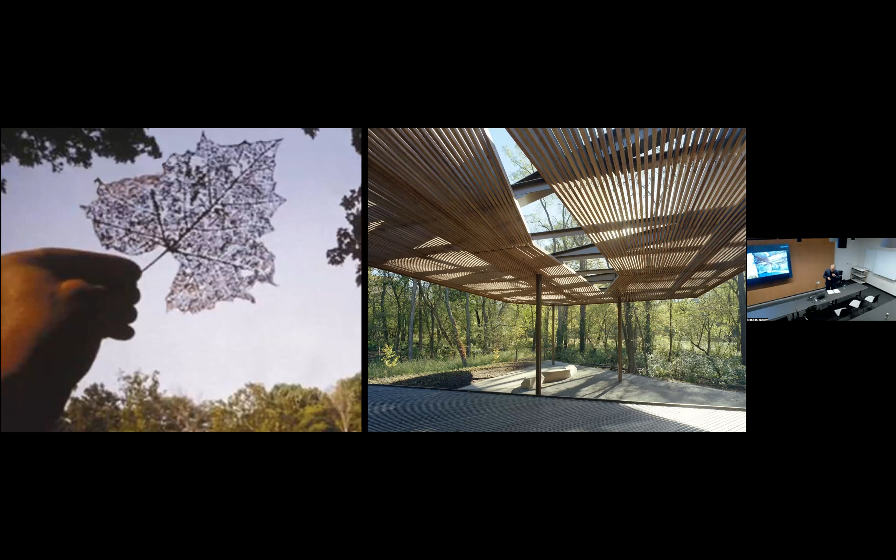So we tend to think of, and when I say we, I'm talking about my partner, Ati, and I, together with our firm of 25 based in Fayetteville, Arkansas.

Rather than a removal from reality, we think of abstraction as the process of connecting to a place, as generating a productive tension between the local and the global. That really is the dialectic which we're working with, and looking for possibilities for using an economy of means for a maximum of meaning.

As a firm of 25, we started out—I started as a sole proprietor 30 years ago—worked into this, mostly doing residential work, then slowly shifting to more public and institutional work. Now we're doing a variety of types and scales, everything from the root work, which is still carports and bathroom structures and parks and stuff, all the way to a new American embassy in the poorest country in the world, in Central African Republic. So, everything in between.

There's a reason for that, and I'll get back into it really carefully. Place is a really big central part of what we're about here.

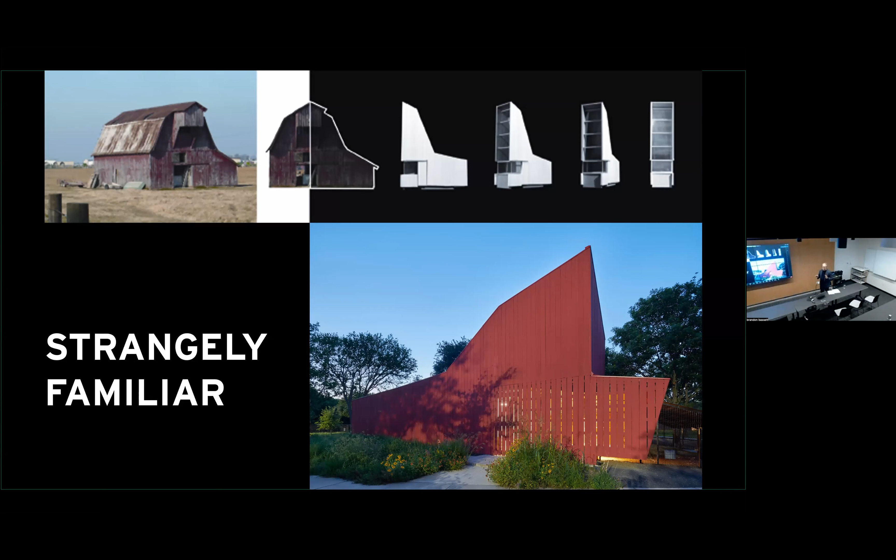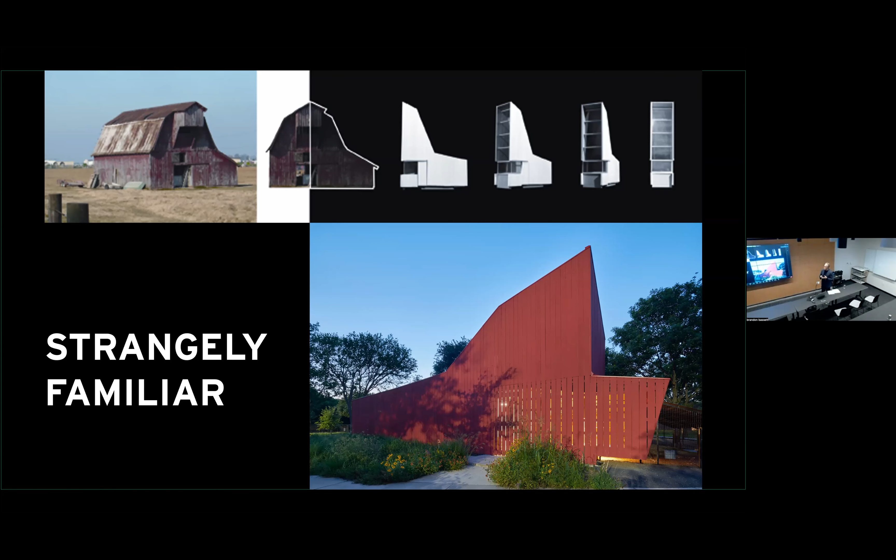And then of course taking the everyday. I'm really paying attention to the everyday, being great observers of your place. We're often just looking at things that are quite familiar with folks and resituating them, creating operations through programming or new siting that allows us to rethink the forms that we're surrounded by into things that are much more strangely familiar as we propose the new. Again, that productive tension between the local and the more universal.

So I'm going to show you a few projects, and I think one project that's really emblematic of a lot of what I'm talking about is a small church in Springdale, Arkansas, St. Nicholas Eastern Orthodox Church. This was a small congregation of Orthodox Christians who have a very ritualized and aesthetic way of worshiping. This is where they were worshiping in a rundown building in downtown Springdale, hardly the dignified place they were looking for to have the type of aestheticized services they were really hoping for. One of their parishioners had died, left them some money, so they bought some property along the interstate and wanted to build a new sanctuary and fellowship hall.

But the money they had left over was only allowed for them a budget of about $100 a square foot. And so they asked if we could build something like this, a nice Byzantine church. And we're like, well, yeah, maybe if it's made out of cardboard or something. It's like, you got $100 a square foot.

They said, well, if that's the case, then could you take this old welding shed on our property and turn that into our church? And I meant like you tear it down and then you build on the footprint. You saw a house today where that was done quite nice. And they were like, no, we only have $100 a square foot. Take that and turn it into a new sanctuary.

Of course, our hearts sank. It's like, oh my God, what are we going to do? And how do we get ourselves into this? Is God going to hang out here? I don't know.

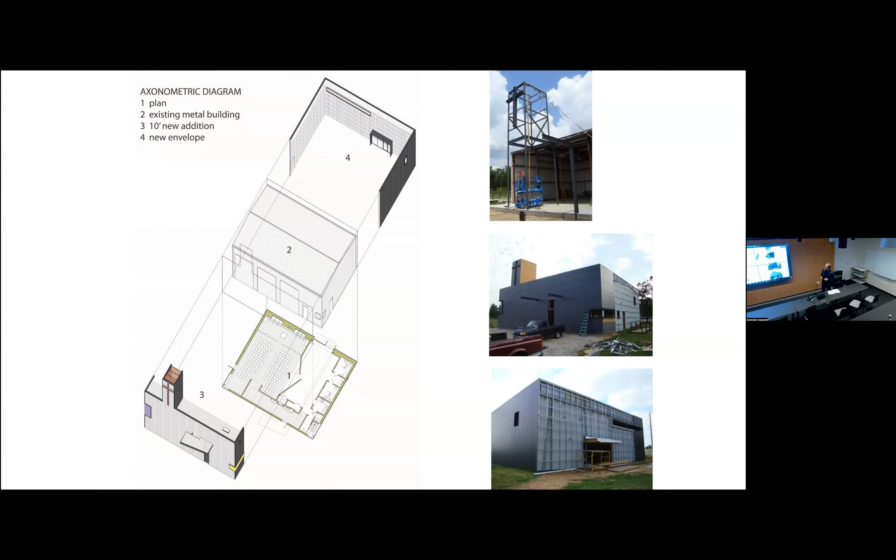And then we took all the transition details at the corners and sills and at the eaves and so forth and broke those ourselves so that we could get the seamlessness of the facade. And then we coursed every rib to a window or door or whatever. There's the fire door right where that concrete pad is. You can't see it. So everything's integrated.

So again, elevating this ordinary system into something, just through the use of craft and precision, into something I think much more otherworldly.

On the inside, we cut a window on the east side in the existing shell to let light in, the morning light. We have an iconostasis. It's made out of bar, angle bar stock.

And then the dome that they asked for, which was supposed to go on top of the building, but wouldn't go through the pre-engineered structure. So we actually put it in the plenum. But they couldn't afford the fiberglass dome they knew we had spec'd. The contractor wasn't sure he could make one that would work craft-wise.

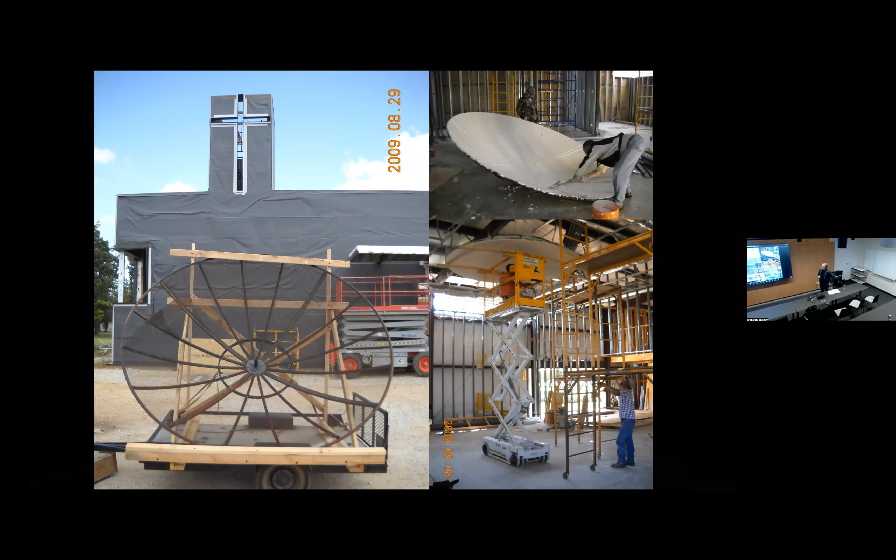So we were kind of in the middle of construction at a little bit of a dilemma. And he said, well, I have an idea. He said, I have a friend of mine who is an old metal worker and lives about 20 miles out in the mountains, and he loves beer. So we gave him some beer, a couple of cases, and he gave us a satellite dish. Here we traded. And so we just brought the satellite dish in.

It's natural lath, so we skim coated with plaster, jacked it up on a scissor lift, and they have their dome. So that's how we roll in Arkansas.

And I was so happy because I told Father John, look, Father John, now you have a direct connection to God. And he reminded me it was pointed in the wrong direction.

Keep moving. The beauty of the story is that in 2013, we were contacted by the AIA National Institute Honor Award program to let us know that this had won an Institute Honor Award. We were, of course, very pleased. But they said, we were really impressed with the budget of this building here.

So we did some research, and we've discovered that this is the least expensive building to ever win an Institute Honor Award. It underscored what we've been trying to do for the last 30 years, which is to demonstrate that architecture can happen anywhere, at any scale, at any budget, and for anyone. It's not just reserved for the few. It should be accessible by anyone. That's something that's really driven us as we've continued our practice and continue to grow.

So just working with humble materials that we can find in our own place. In this case, our cash crop in Northwest Arkansas is rocks, because we don't have good soils. We don't have an agricultural base, but we have our rocks. Folks would take the rocks they find right there on the earth and tilt them up to make cladding for homes and churches. It was a very economical thing to do.

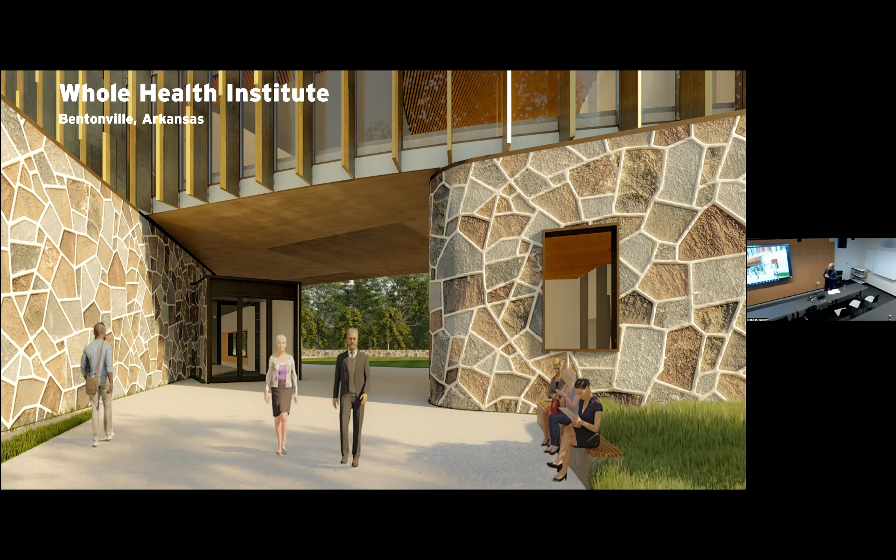So starting with this idea of a material, we begin to abstract and develop our own way of updating this sort of vernacular to essentially make the base or the podium for this building, which acts as an extended threshold into the campus of Crystal Bridges.

And this is it. Sitting astride that is a series of offices, lounges, and meeting rooms and meditation spaces. Down below is a lobby with an exhibition hall that you can see here, as well as event spaces and offices as well.

And this whole building, we were encouraged by the owner to begin to introduce curves, because we tend to like to do a lot of boxes. She didn't like boxes. It begins to resonate with the Moshe Safdie design of Crystal Bridges you see up on your left. We also did a parking structure that I'll show you here in just a little bit. She's also in the process of building a medical college, a four-year medical college dealing with whole health. So very serious, incredible investment in this intersection of art and health and well-being.

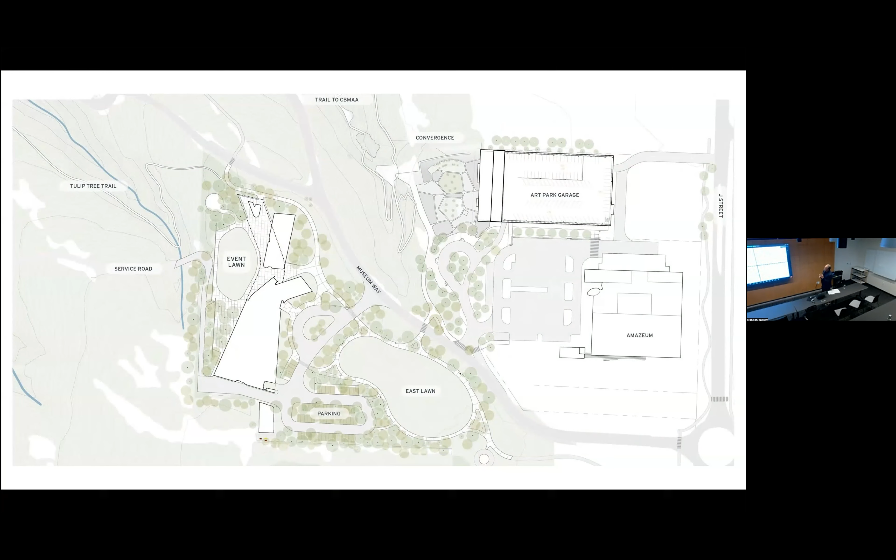And the whole curving shape is really curving around a ravine, so it's being shaped by nature, by the particularities of the siting of the building itself. Here you begin to see how it wraps around the ravine and these event spaces in a series of porches and a community porch in the upper floors.

There you get a sense of the 3D and its relationship to the art park and the convergence, which is an artscape in the ravine.

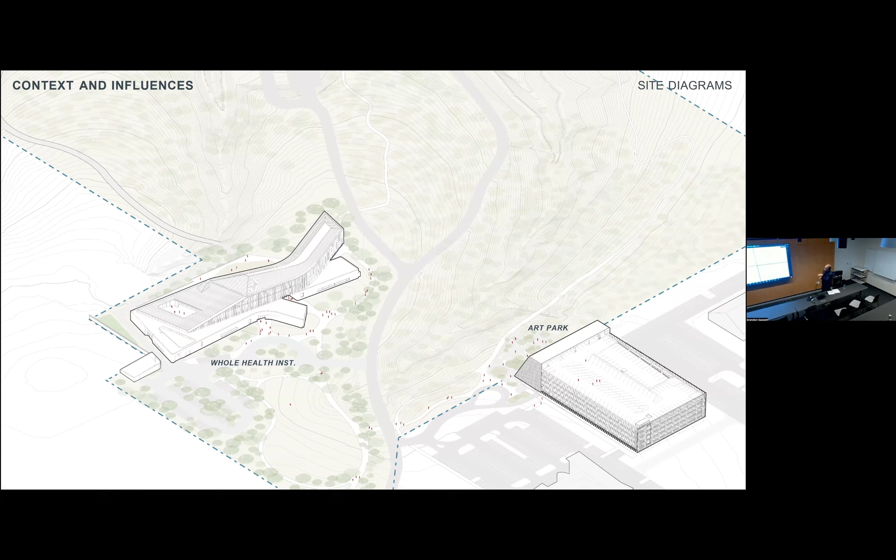So let's keep moving. The material strategies here, we began to think about this idea of the cave and the forest. The cave being the stone base that rises up, that's the kind of geological connection. The forest, we're in a state that's 60% forested, and we needed to develop a brise-soleil on the east and west to really control the sun. So we knew we could get energy savings, but wood is not the most durable material on the outside where I'm at.

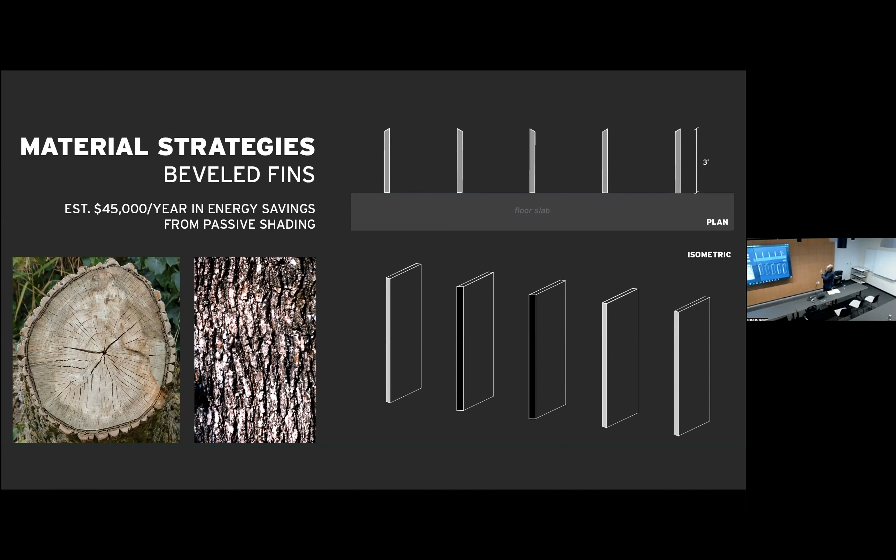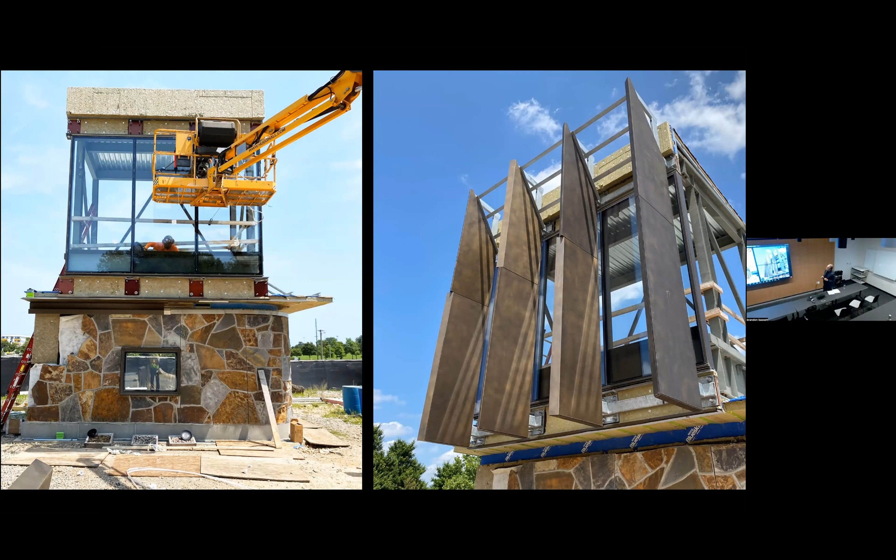So we found another material, which was a kind of pre-weathered brass, but for durability, we began to bevel the edges of these fins to catch the light and shadow to change over time. Here you can begin to see these mock-ups where we're testing the stone, testing the fins, this whole system of articulation.

I like to move fast, and this is killing me. But you can see the reflection off the fins, this idea of the forest astride the cave, the stone, and the base.

Wow, this is so slow.

So it's currently coming together, currently under construction. Then as you move to the inside, this idea of the cave and forest are carried through. I just have to be patient.

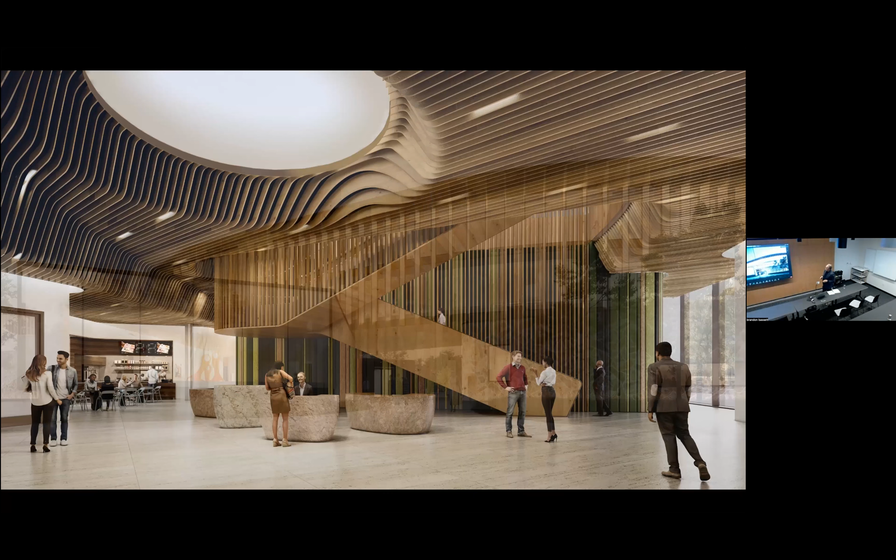Here we go. So the entire canopy of the ground floor and up above, it's all CNC milled pecan, Southern Arkansas travertine floors, stone floors. It's really at a museum quality level because it's actually part of a museum campus.

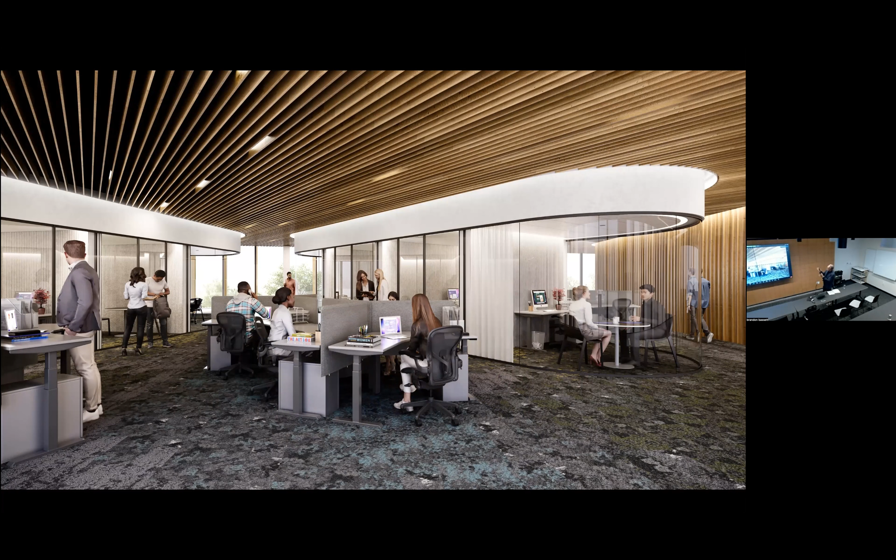But as you move up, there are open offices and consultation rooms above, as well as project labs and lounges here as well, for ideas to happen in all sorts of spaces and places inside.

And one of the feature spaces is a 30-foot high cone that's actually bent towards the north to capture north light, which is a meditation space for all the folks that work here, but also for visitors and patients that come as well.

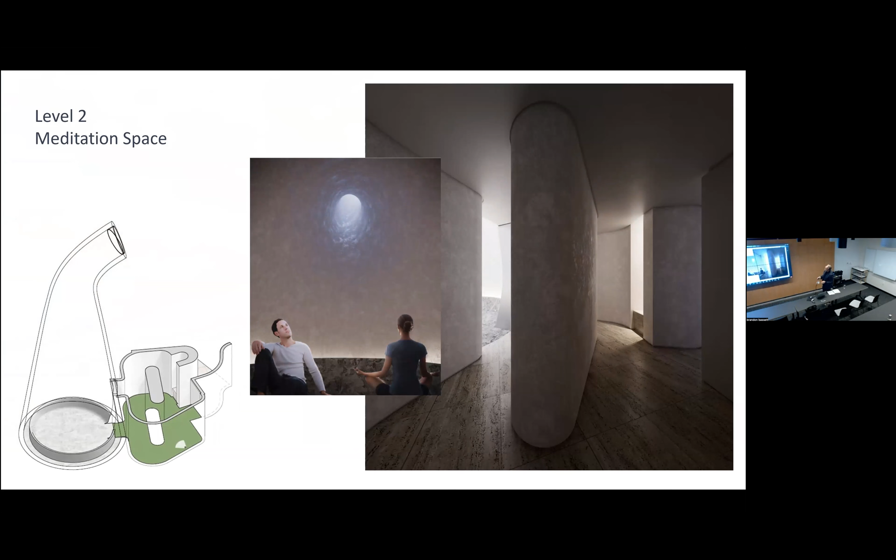And this is all kind of hand plastered. You can get to see that figure with this antechamber where you kind of decompress and then into this space, which captures again this north light and softly just deposited. It kind of just falls very gently along the conical walls.

Wow. Okay, and then the event space down below on the event lawns.

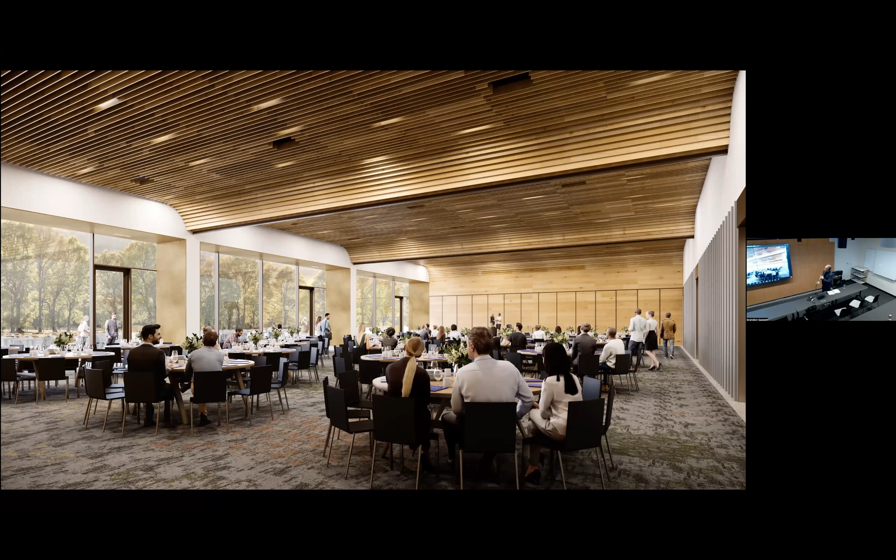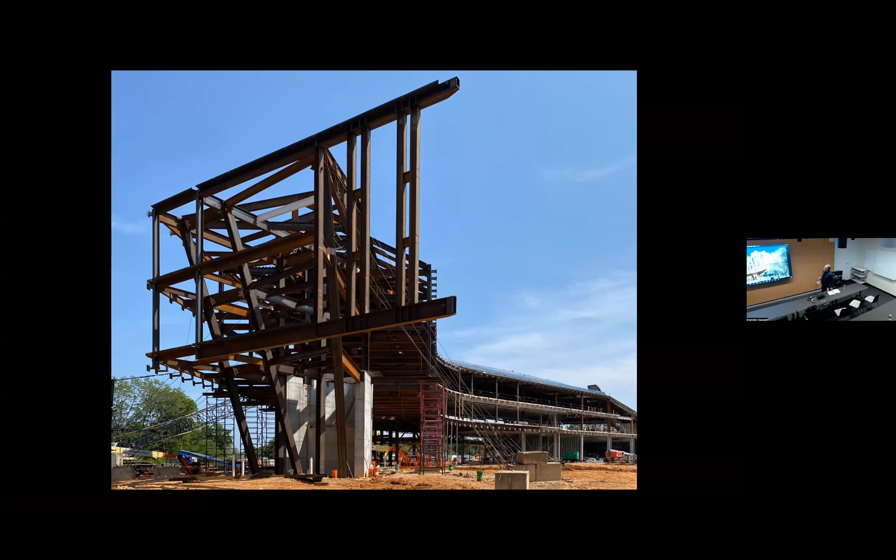Construction here. They did a 3 a.m. concrete pour on Friday. I wasn't there, thank God.

And I just want to show you very quickly our parking garage. This took the place of a surface parking lot, so we had to put 800 cars in a structure.

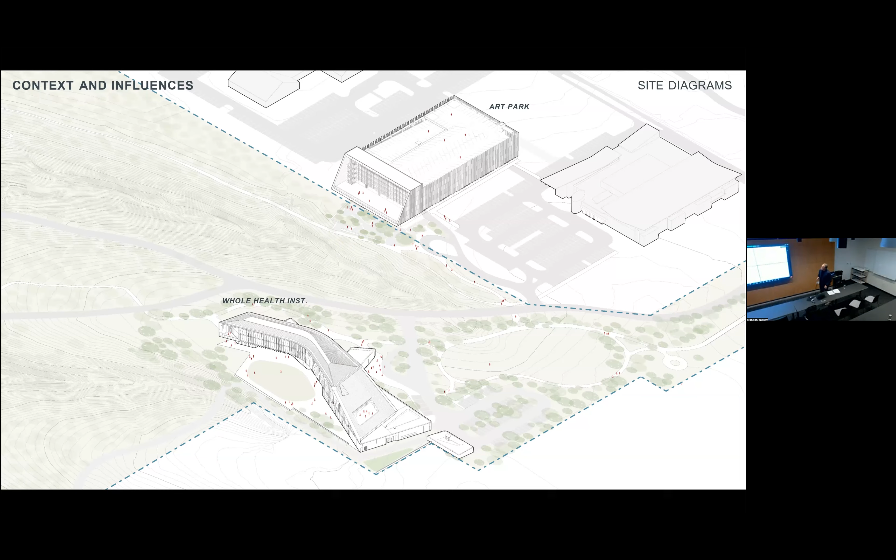But we didn't want to just make the structure about cars. It faces right onto an art plaza and play scape into a ravine that rolls up into this plaza. So we developed a proscenium, 150 feet wide, 4 stories tall, where art performances take place.

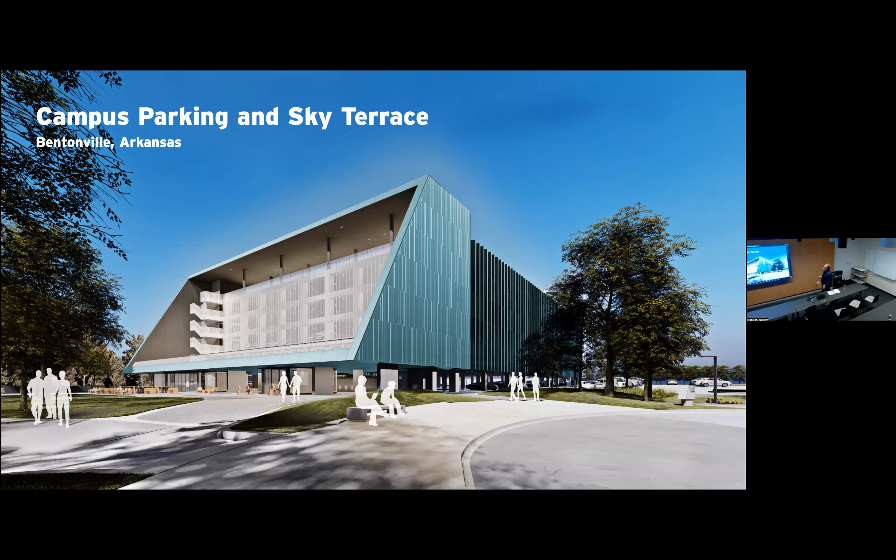There's a glass bar underneath the shop, so it really gets integrated into this landscape of art, nature, and the rest of the campus. So it's not just a silent figure here.

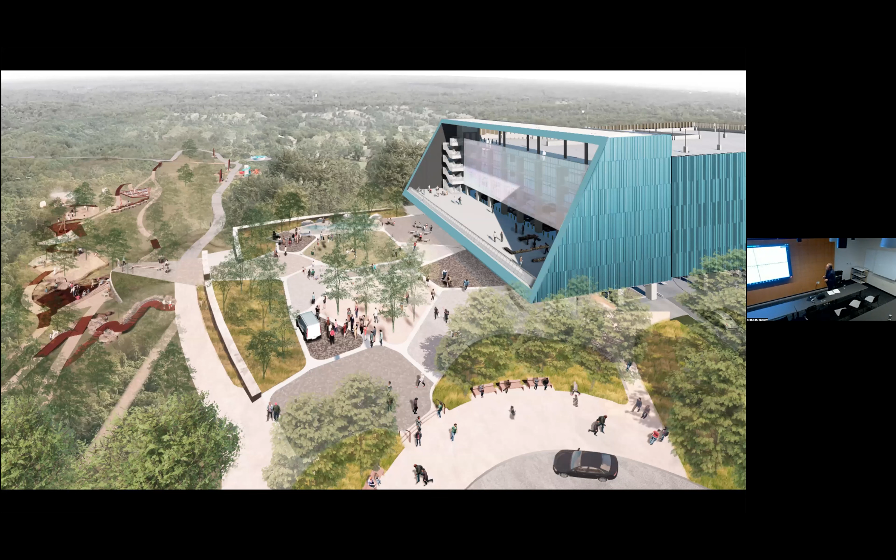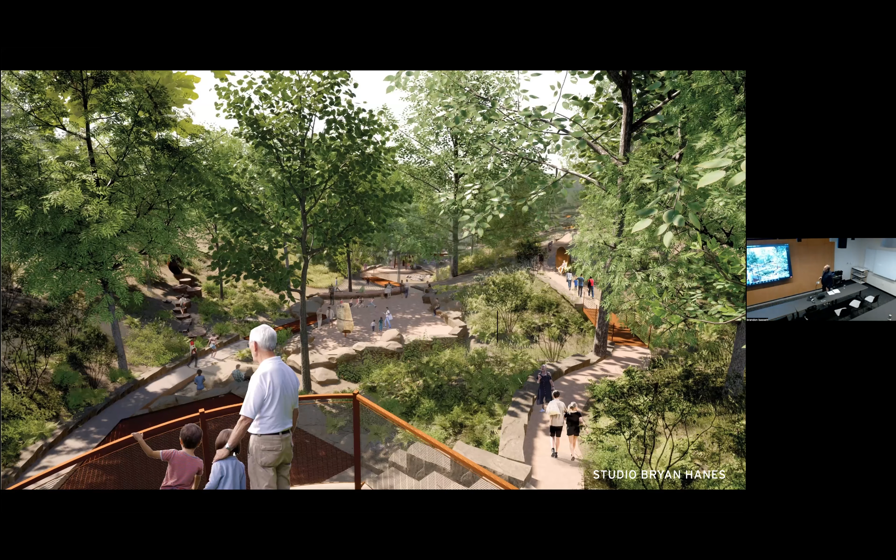Here you can begin to see it as it manifests itself once it's all done. It just got completed a few days ago, but this is the sort of type of play. This is the Studio Bryan Hanes out of Philadelphia, really great landscape architect, now under construction.

And as you come back up through, you see the proscenium. We call this the fish head. Come through, kind of get that sense, that kind of interface with the parking. So everybody comes through this.

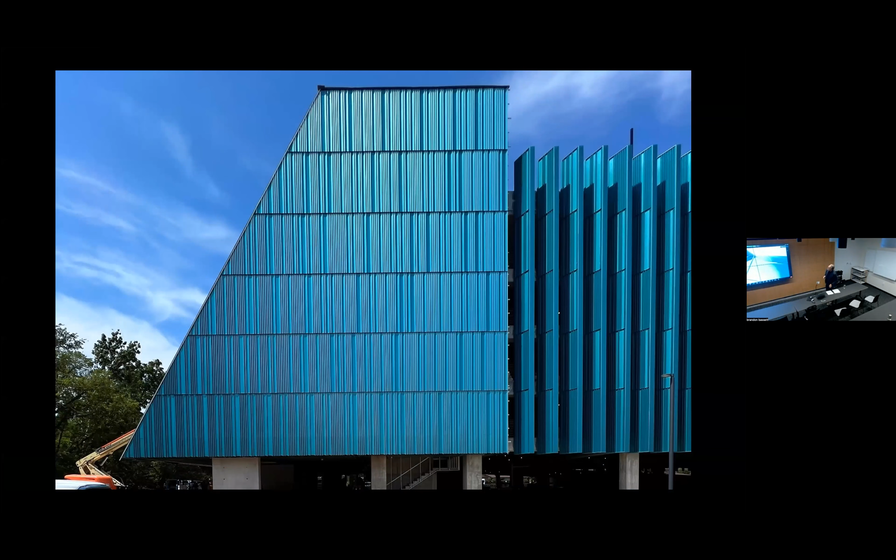So really trying to test that out rather than just using what they provided, and then using metal flake to enliven the surface. So this is all a '64 Pontiac Tempest. My grandmother would be very happy with that.

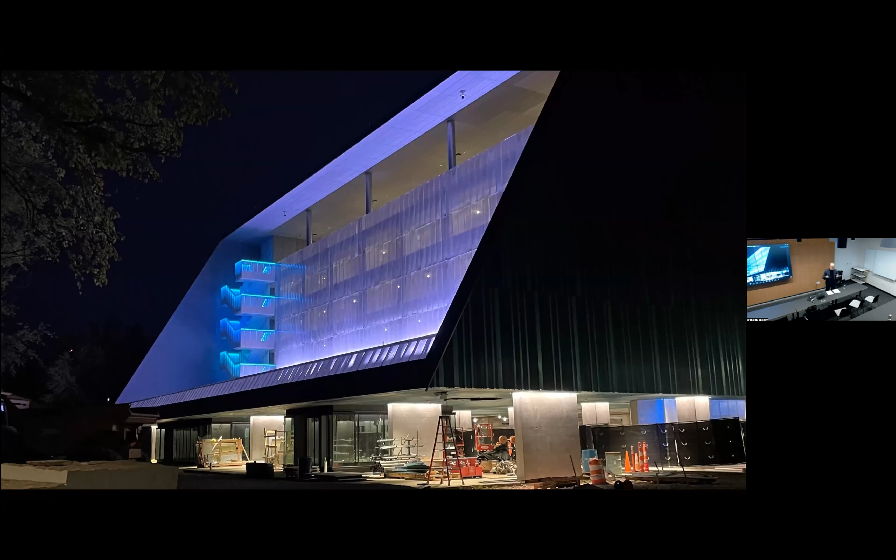Here we go. It really works quite well with the sky. Comes together. And then we have an incredible lighting program in this, so this thing pulses at night as well, with a variety of light phase shift changing.

And we've always thought about the fugitive nature of silhouette. As a former cartoonist, I like working in silhouette, working in section, and how that works against the horizon in these rural settings. The problem with a lot of suburbia today is most of the buildings there are all trying to outdo each other.

It's like 18 or 19 jigs and jogs on them, maybe 32 different materials, all this sort of excess and undisciplined way of approaching design. We thought, what could we do for this new pediatric clinic that could just use one form, two colors, and one material? That's it. So turn the volume from 11 down to 2. Of course, we're operating in suburbia, which is also known as the land of beige.

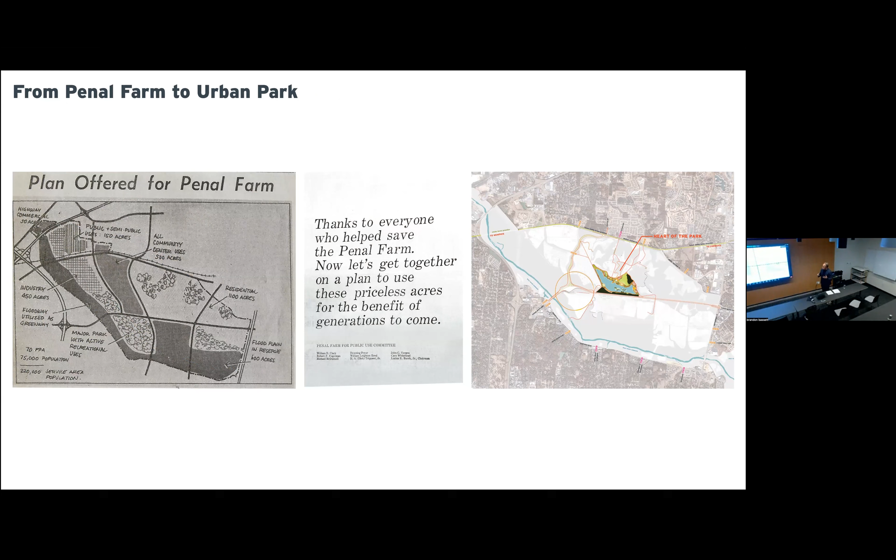Well, the citizens around that area rose up and said, we want to keep this kind of beautiful natural asset more as a park, even though it has its agricultural aspect. All of this is useful, and it could become a park. So it became a nonprofit - that's how Shelby Farms was born.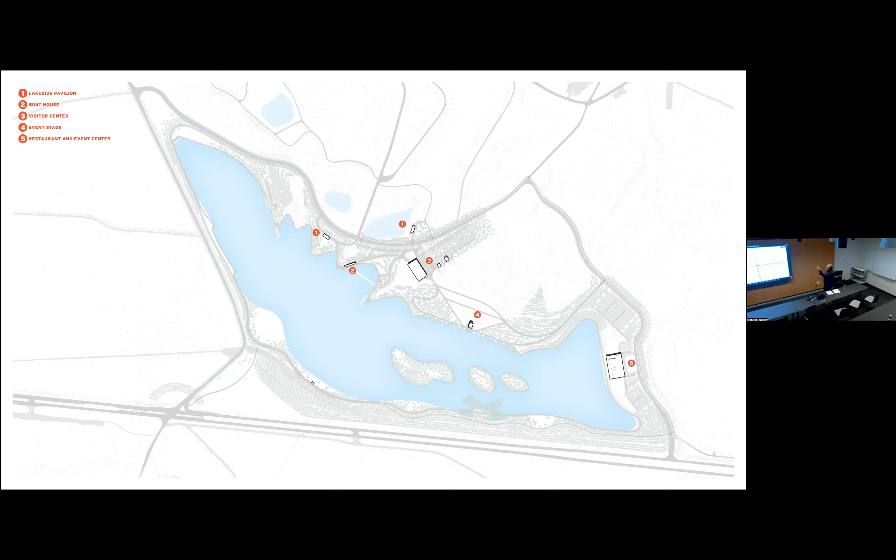You can see the heart of the park where we're working. So we have a visitor center, a restaurant event center, conference center, stage pavilion, boat pavilion, shade pavilions - all of that to help articulate the edge and the spaces between with the field operations.

One of the things we noticed on site is that wherever there was shade, there was people. And it reminded us that we were working in old agricultural land, formerly fields, with no trees. The trees aren't going to come in for a while, so every building had to create its own shade. That's part of this porch language attached to each of these figures that make up the ensemble of buildings we did, looking back at the vernacular ways to create shade and breezes: dog trots, porches.

We did our first building, an 8,000 square foot visitor center with an 8,000 square foot porch that faces south. It's all made with aluminum bar grate panels, stuff that you typically walk on, used a lot in the agricultural industry around this area. So we turned that into a cladding system. We figured out how to not only get it to become cladding by disengaging it from the superstructure and creating a substructure, but also make it operable too.

Then we have third growth cypress, local cypress, as the other primary material. So you approach through this box, and then through these series of breezeways that take you out onto the porch with this 32-foot cantilever, all cooled by 5 20-foot big ass fans. The thing about being in Memphis in the shade, you're still going to sweat, so we ventilate that shade much the way that nature does, and make this great place that they can program almost year round because it's in the shade. So it's a place for yoga, receptions, and they get revenue for it - another stream of revenue, and it creates a really responsive skin that reflects light.

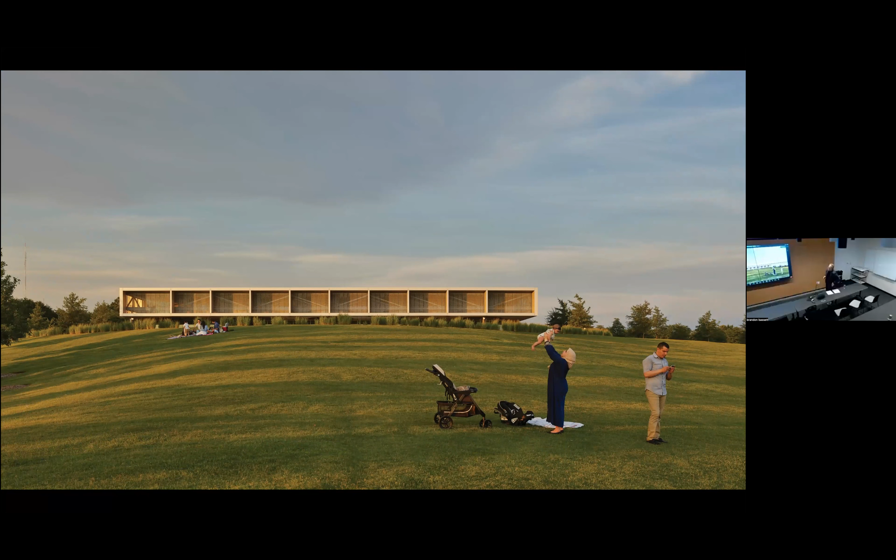Yeah, take off your shoes. And that sounds good. I don't know, is that the kid in the screen?

I think it's quite beautiful how James Corner and his team configure the land to work with the buildings as well. It's a nice simpatico that's going on there.

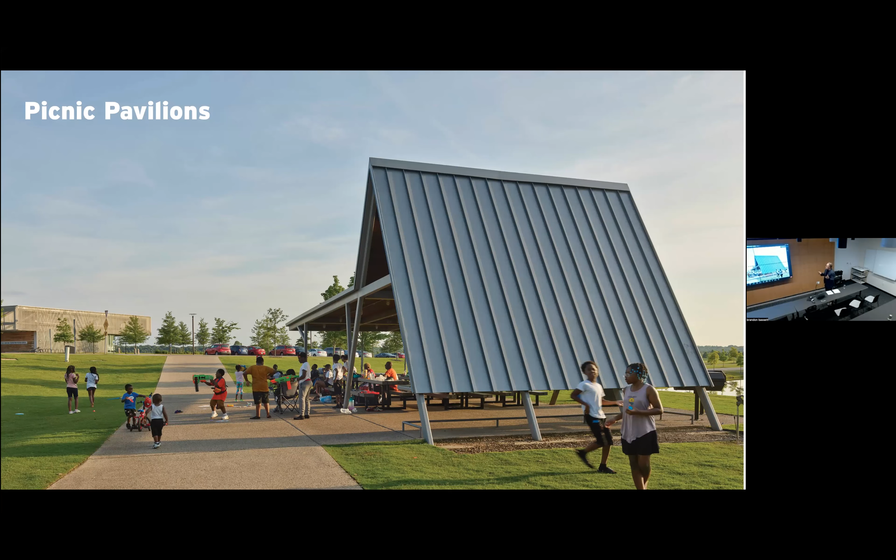Other things we did were the picnic pavilions we call the crickets, which people love. They're great for family reunions, sometimes booked out 3 months at a time for that, dotted along the edges here.

And then of course the boat pavilion that has all the kayaks and canoes in it, as well as concessions along the water, and it's also near the water play area. Similar palette of material - really just 3 materials for the whole project.

This is the stage pavilion that uses the event lawn, but also acts as a stage for events on the lake. And then when it's not being used, it's a shade pavilion itself - so kind of multifunctional. It's really important.

And then the last building is the conference center, the restaurant conference center. At the time this was built, we were working with Kimbal Musk - not Elon, Elon's brother, the other guy you never hear about - but he actually has farm-to-table restaurants based in Boulder. This is their first ground-up restaurant, you see on the right side.

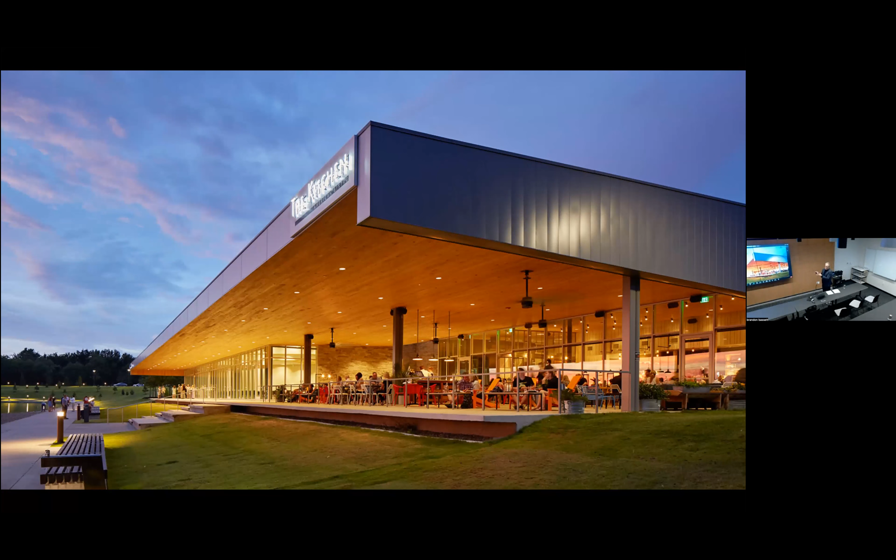The really distinguishing character here is an 80-foot deep porch where there's more seating outside than inside, right along towards the west. There's a 10-foot high canopy that knocks down the sun, which sets up these beautiful sunset dinners and so forth. It really becomes a kind of hub of activity for the park, both day and night.

Since it's been open in 2016, it's turned a profit every year. Its attendance has increased by 50%, and its reflection in terms of diversity has increased by 60%. So what it underscores is the ability for architecture, the transformation of a landscape through architecture, to certainly strengthen institutions and to be very impactful in the community.

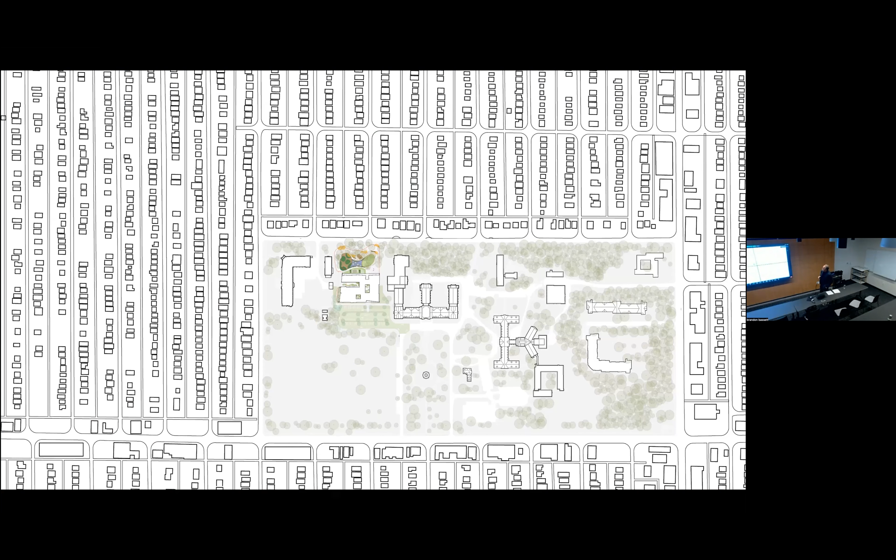Now, we had a couple of challenges. One was that we didn't get to do the community engagement ourselves. That was done by a third party because you had to have the trust and credentials to engage with the neighborhood, but we got to interpret the information we got back. We were working with Wendy L. Jackson, with the Kresge Foundation.

One of the things that we got back was that they did not want a monochromatic building. The community wanted something much more polychromatic, that's more representative of their culture, inclusivity and diversity in the neighborhood. That was kind of terrifying in a way, because there's one thing to do lots of color on the inside, but to pull it to the outside is scary, at least for us, since we like solid colors. Well, I got to thinking about it, and I thought, polychroma, and she said, sort of like a quilt, like a patchwork, perhaps, of color.

The other thing we had to do is the building had to be as resilient as these stone buildings. So we came upon a simple glazed terracotta panel rain screen system, made in Germany, that would have incredible resilience - it would look the same 50 years from now. That's what they wanted. But we needed the color.

And when we're talking about quilts, I said, have you ever heard of Gee's Bend in Alabama with the quilt ladies? She goes, well, of course, I've been there. And I was like, wow, so have I. I said, well, what do you think about that? She goes, I think they would be a great source of inspiration. So we went and met with the Pettway family there, getting a feel for how they do quilts and how they use accents.

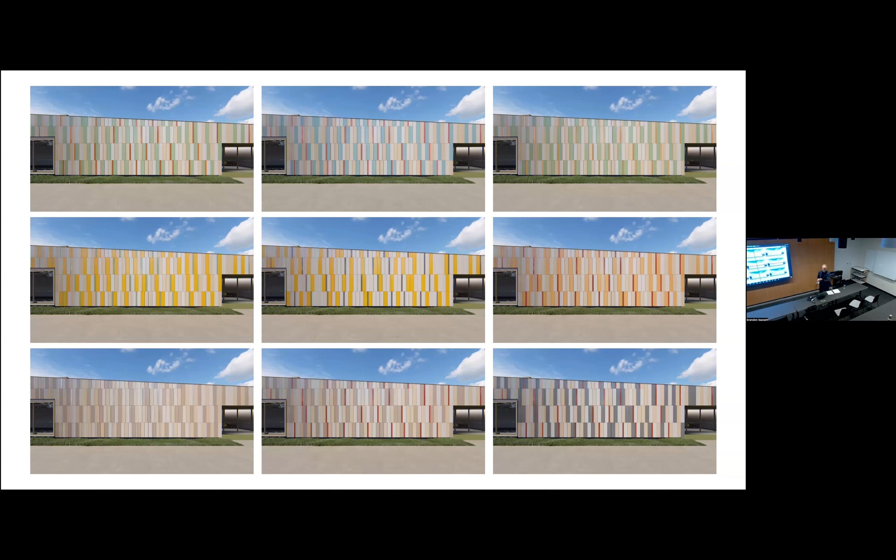Every color costs money, so we were limited. We had to have a ground which would work with the existing shades of limestone, but also accents that would enliven that. So we went again to Gee's Bend, met with the folks, came back and did over 150 different iterations. These are just a few of these palettes, with prices attached to each one, to find the exact right one - which is the one I've been showing you - but it really brought it to life, and it's vivid and a great source of pride. Unlike any other thing, the identity issue is I want something no one else has, and I think we certainly achieved that here.

And then, of course, the light is grabbed from a series of windows from above, from the side, from the front, very gentle and welcoming, with the wall that takes you into the entrance. You just sort of roll into the lobby area.

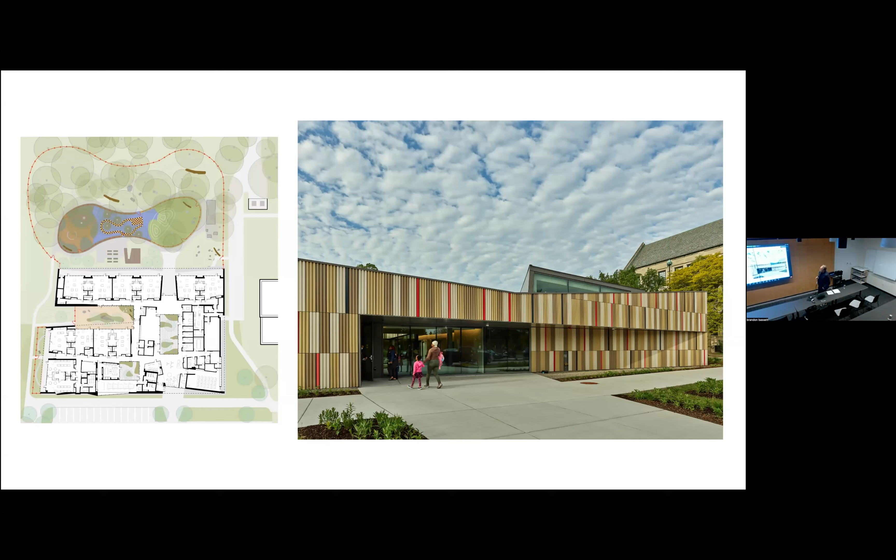As you come into the lobby, the first thing you see is a courtyard with its controlled softscape and hardscape - places for reflection, places for play, places for learning as well. There are 3 of these courtyards, and they really inform and activate all the spaces around them, so there's no space that isn't cross-programmed in some way here.

All of the classrooms have direct connection to the outside, so a learning lesson can take place here but can immediately move to the outside to make a point. That immediate connection to nature was also designed by the community because, as you know, a lot of Detroit - 60%, I think - is somewhat empty and abandoned in certain degrees, or blighted. So having this constant positive reinforcement of nature every day was something that was desired, and these courtyards can be used in multiple ways, from dining to play to doing lessons.

Every space, even in the hallways, we carve away places for people to sit, places to socialize—in this case, a reading nook. All of it gets activated as learning space. There's even community rooms and a coffee shop, so when parents drop their kids off, they can hang around and don't just have to go back home. We have community groups meet here as well, so it has a role to play during the day and even at the end of the day.

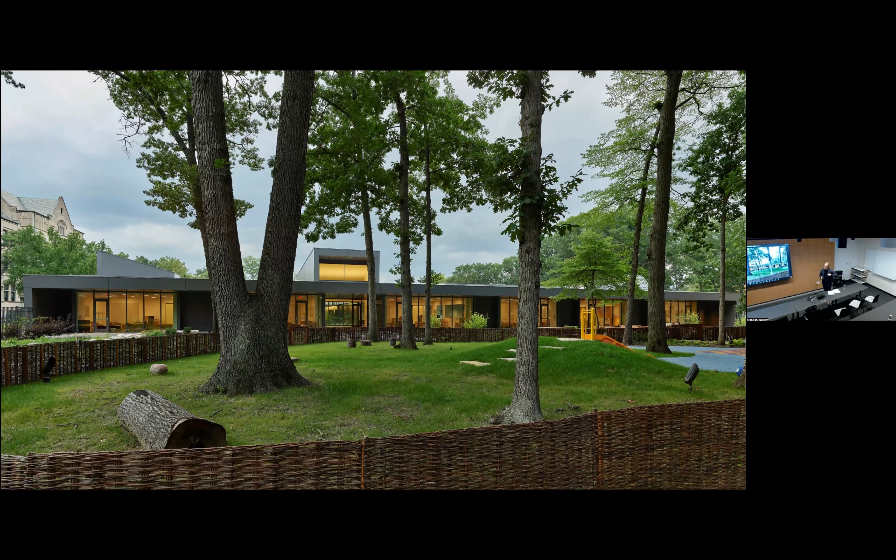Then this spills out into a southern lawn. Margie Ruddick, our landscape architect, did a beautiful job weaving in a learning and playscape amongst this grove of trees. It's really quite lovely, incredibly active throughout the day, but at night it acts as a beacon back to the neighborhood. Most of the folks from the neighborhood actually walk this way to go to school.

So let's see, does it want to change? See how this works. Okay, great.

It's been a huge success. I just want to say that the word people use for it is joy. The students, the faculty, the staff—there's just a great sense of joy in this kind of world within a world that we're fortunate to make.

I went back to Gee's Bend, just by chance was traveling through, and I stopped and saw Miss Petway to see what she had for sale for her quilts. I told her, you know that building I was telling you about is done. She said, oh really? And I said yeah, let me show you. I had a photo on my phone, showed it to her, and she looked at it and said, you know what—you've given me an idea for a quilt. So it all kind of comes back around.

One of the things our firm has gotten known for—and I think you probably see a little thread of this through some of the projects—is the desire to ennoble the prosaic, to take the everyday and elevate it in some form. We had a recent opportunity. I've only shown this project about three times since it just got completed in Fort Worth, Texas, and it's an unusual project.

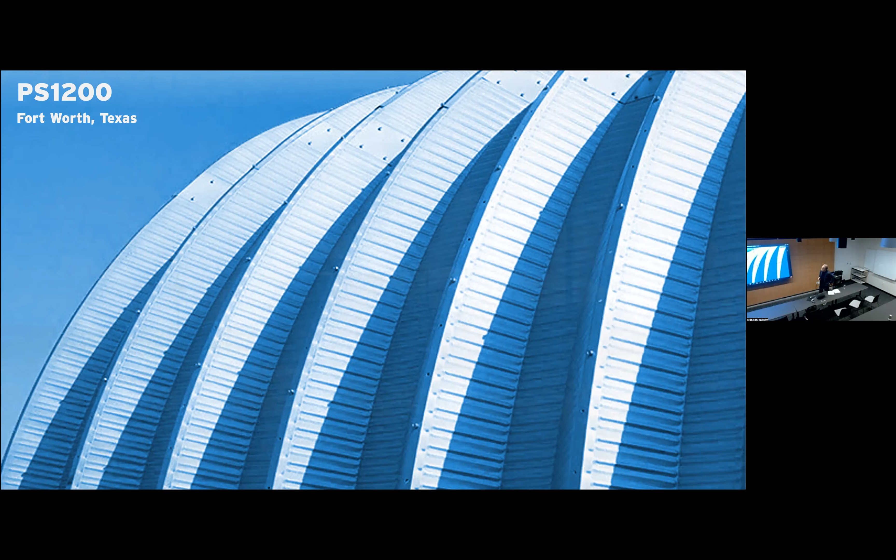It's a mixed-use project, but it was really born out of being in Detroit. While I was there, I met a young developer named Philip Kafka. He was buying up a million square feet of basically abandoned property near downtown and trying to repurpose it through housing enclaves, public plazas that would sprout collateral economies around them—restaurants, office space, that sort of thing. What he was using to articulate a lot of this was the simple Quonset hut.

Normally you see a Quonset hut out in the country, really light industrial—maybe somebody will live in it once in a while, but that's usually how it's used. Philip tends to use it in a much more creative way and makes these enclaves. He has one called the Caterpillar, which is 600 feet long, that he cuts up into housing. But it's something he also wanted to test out in Fort Worth, where he grew up—in Dallas, Texas, actually, he and his father.

This project is called PS 1200. It's in the Magnolia neighborhood, an emerging neighborhood in Fort Worth, Texas. We're all using the Quonset system. It's got housing at the top as the backdrop, sitting above a base of offices, and then a restaurant, grab-and-go, a gallery and bookstore, and then a public plaza. So it's a private development with a public plaza, and the plaza was all designed by Julie Bargmann, D.I.R.T., a great landscape architect. I'll show you a bit about it.

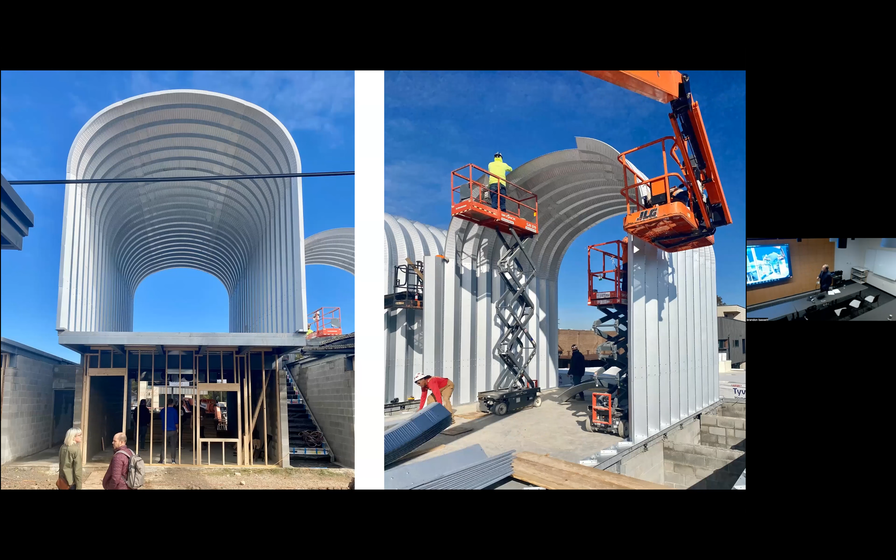Once the bases are established, these go up in about a day and a half. It's all prefabricated metal panels made by Steelmaster. Then, of course, you insulate everything and finish it on the inside.

The big trick we wanted to try was consistency in vocabulary, because we had all these disparate programs - they're not all the same height, the same size. So we also looked at taking the same system and flipping it on its side to make a cladding system. So we have structural and cladding.

And in this case, same with the plaza - the restaurant, the grab and go, all of that become this Quonset system that's flipped on its side. It sounded really easy, and it was really hard. I learned a lot of lessons about custom curves and all of that sort of thing. But we'll be better prepared next time. It came out quite nice.

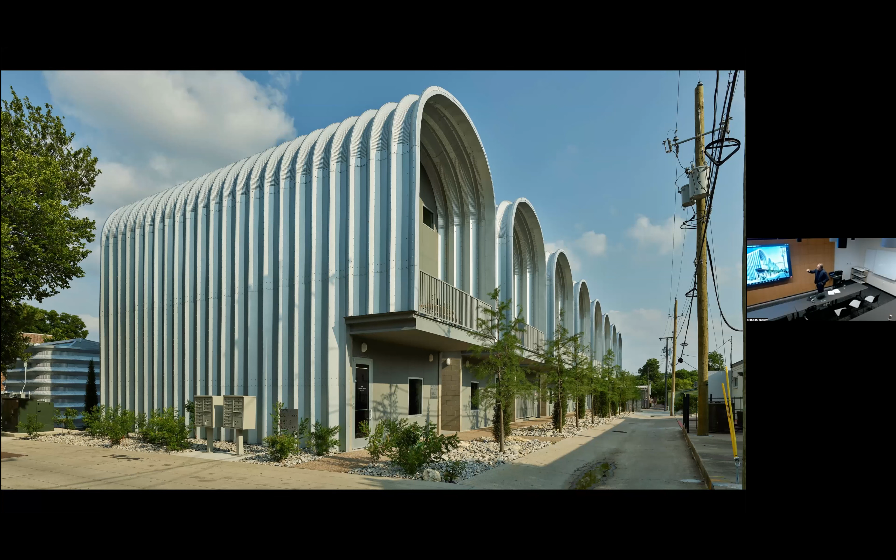And then just how you create light in these places as well as the bookstore. And then on the alley side, so you're living up above, you have your porch in the back that shades the offices below, and a much more messy context along the back. I think this works quite well with that - that's all stucco, entrowel stucco infill.

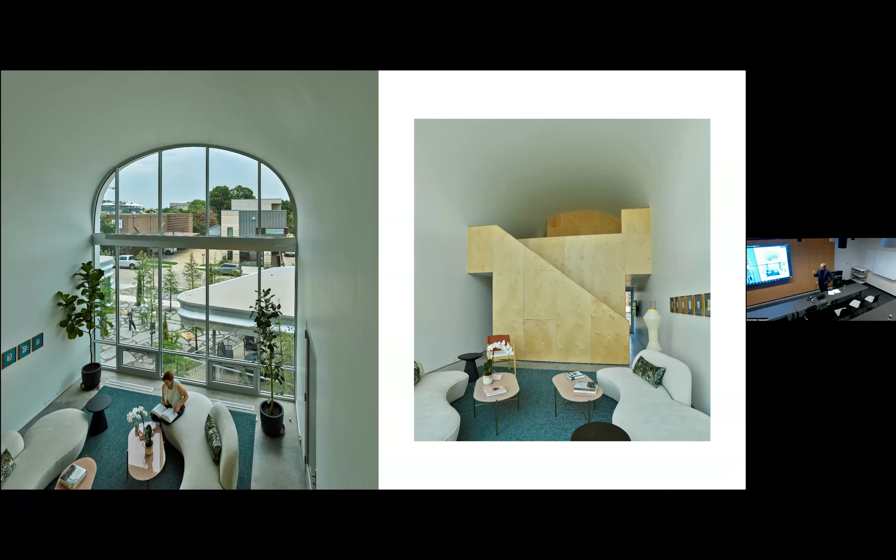And the inside, just one beautiful space, and then the insertion of a maple plywood service box that has the kitchen in it, the bathroom, and then up above a bedroom loft with its bathroom as well. So just real simple, very minimal.

And then the interstitial spaces again that are getting activated. What Julie did is she uses recycled stone here. She only uses two trees, a pond cypress and a regular cypress. Now, most landscape architects I know use cypresses to screen things or like walls. Julie uses them like jazz notes, and she plants them close to the building because she wants this to become a forest that overtakes the buildings at a certain point, so it becomes much more dense. That's the intention of this.

And businesses are moving in now. In the base here, we have a barber shop, and the community is really starting to own this, and it really becomes as much as anything a public work as a private work.

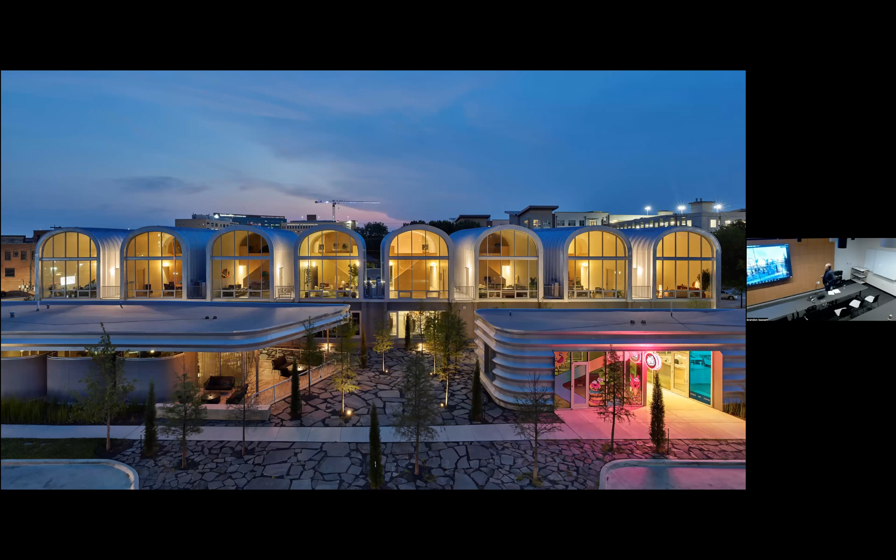Get back to the plaza, the jazz notes, and then a little snippet of evening, and the scene right out of Rear Window - our photographer climbed on the building across. This is the only time you'll ever see all the shades up and no one at home.

But really excited about the project and how this can find its way, this prosaic system, into an urban condition and make itself at home.

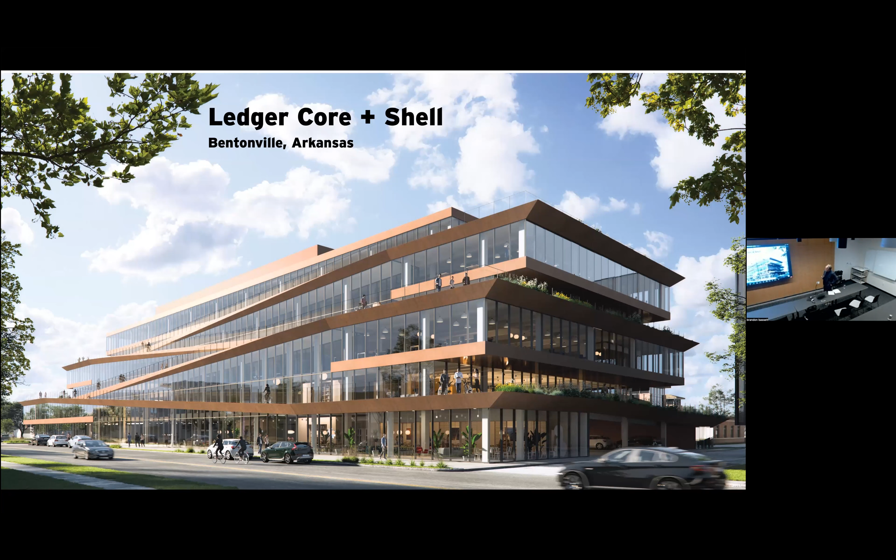So I'm going to move now back to Bentonville for these last two projects. We'll wrap it up. So very often for us, it's about taking the culture of a place and using that in some way to shape the building, either through form or material. This is a building called the Ledger.

It's a 200,000 square foot office building, about 4 blocks from the town square in Bentonville, a town of about 40,000 people. It was intended to be WeWork's first ground-up building. It's a design collaboration with us and Michel Rojkind, Christian Callahan, and Haruka Rucci, who were part of WeWork's architecture team.

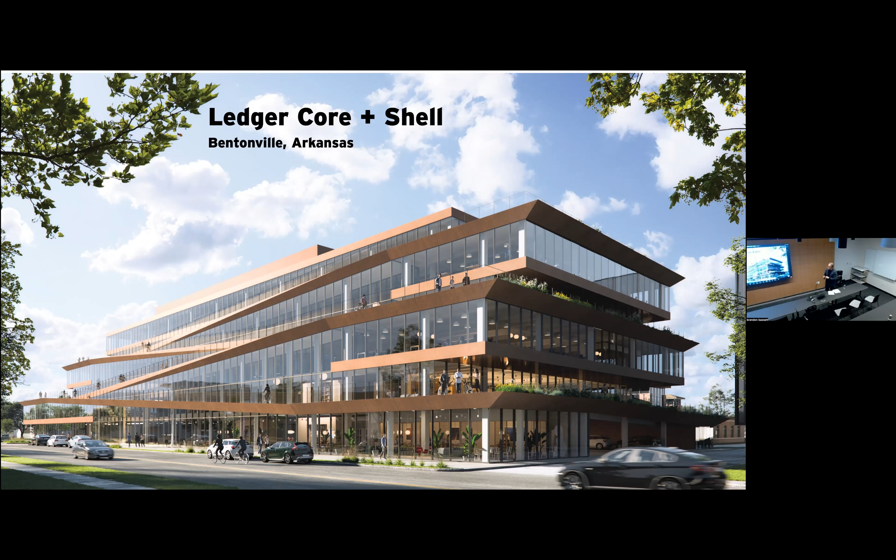Everybody knows what happened to WeWork. Middle of COVID, it imploded. These folks were let go, so they started their own firm, and Michelle already had his own firm in Mexico. We decided to keep working on it as a team, a collaboration, and finish it all the way through. The idea of the building was pretty simple: here we are, and the #1 mountain bike destination in the country is Bentonville, Arkansas.

So the idea of mobility and biking as a way to shape this building, become part of the building, to take public space and run it diagonal of the building into a series of public plazas—it was great.

So my battery, somebody's battery is low. For your charger, so it will not work. Oh, sure. I love technology. There you go. Everybody happy, got the juice.

All right, so let's dive into this real quickly. You can bike all the way up to the 6th floor. You can walk, it's all 1-to-20 ramps, and the exteriority of this inscribes itself in the interior. So this idea of mobility becomes part of the interior in this co-working office environment.

It's simple palette, glass and copper, and these copper ramp spandrels actually become planters as they get to the different terraces up above.

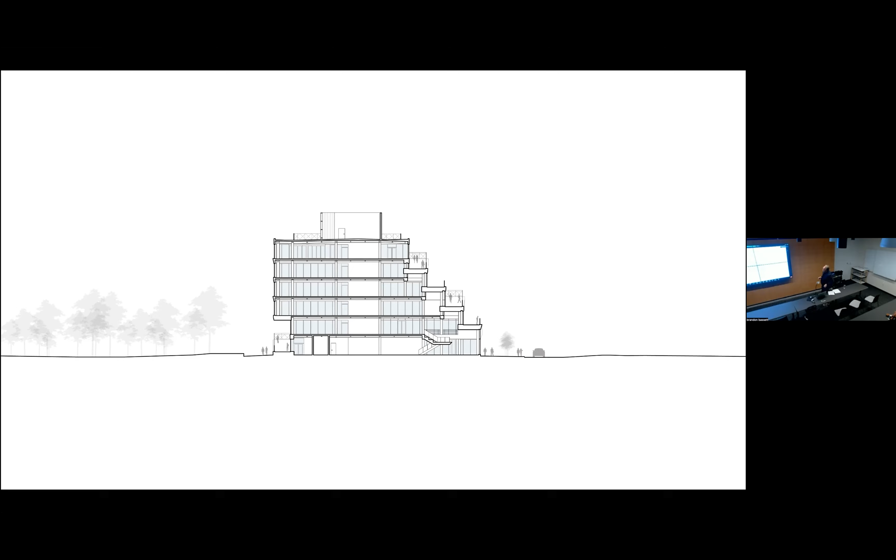You can begin to see how it kind of works with the street. In the 6-story building, it's actually stepping back away from the street, so it doesn't loom over you as you get up close to it. The ramps get this thing to move away from the edge of the street, and really there's a city park on the other side. You get a sense of that, and then activating the sidewalk as well with the dining and so forth.

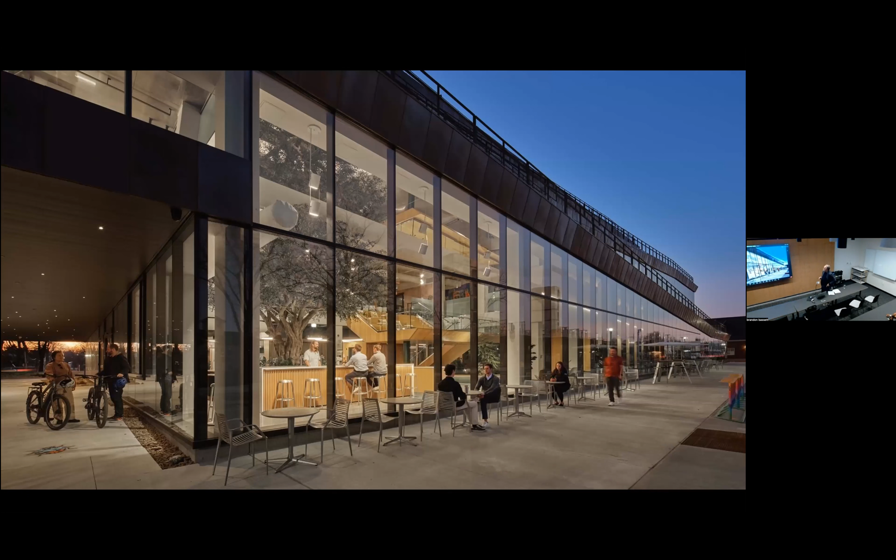But then up above, you can begin to see the motion of the public plaza and these creatures, these Ozark creatures carrying Ozark gems—this was Stefan Sagmeister. This is all glass tile inlaid into the concrete. They all move up and collect on the top ledger, and they spell out 'now is better.' So it's a whole story that folks really like about being in this place.

So you get a sense of the activity that takes place throughout the day when it's not 107 degrees. It happened, but here it is not a rendering—this is actually how it is. So it really is quite a dynamic and active place, so much so that they're billing it as the world's first bikeable building.

Sagmeister came in with these shingles and made some of the local bass up on our parking garage wall that sort of shimmer and glint in the wind. It really gets another opportunity for art to come together.

Anyways, there's the idea of material culture, but then it's just the culture that you can use in the architecture. So the last project I want to share with you is a school, a maker school, 6th through 12th grade.

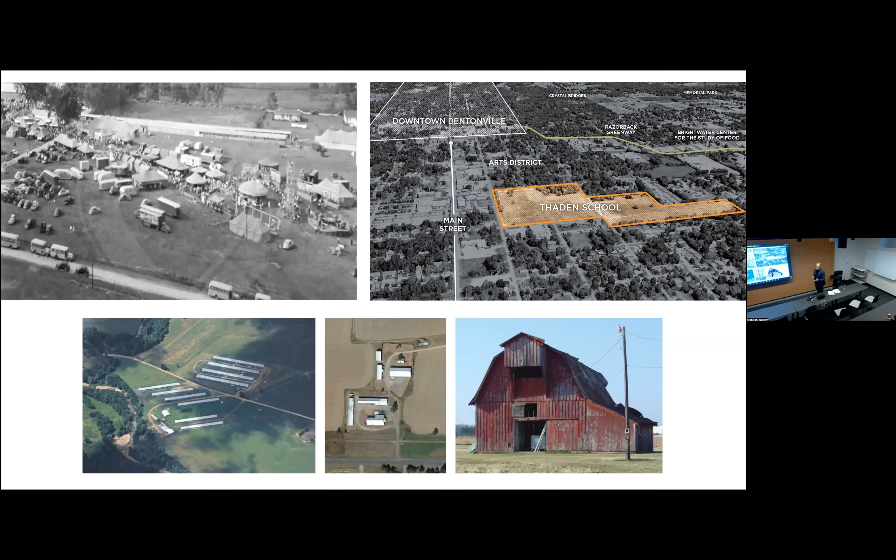We like to call it urban pastoral in our neck of the woods. So we're looking at farm groupings, chicken house, and other things. We're starting to think about the master planning. This was a collaboration with Andropogon, another really great landscape architect, and EskewDumezRipple, who did the home building here, and then we did the other buildings. So we're all working together on this master plan, thinking about this layering of landscapes, community geothermal, how we manage the water.

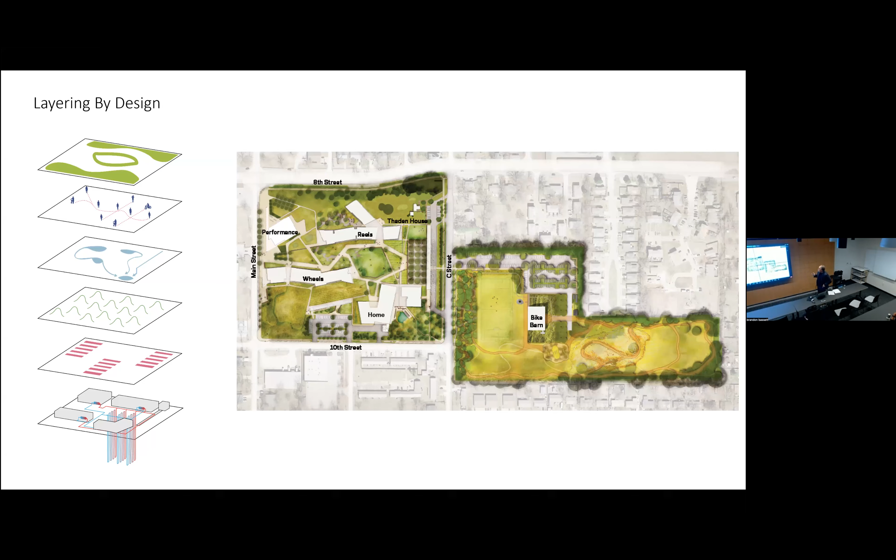We have a water lab on the corner here, which is a learning scape. In fact, there are no canopies here on the building. You are encouraged to walk across the campus, to get wet, to feel the cold, to use this landscape—a series of Osage prairie grasses and Mima mounds and so forth—to be educated by it. So learn by doing. This layering by design, the landscape, really becomes learning by design as well, a learning landscape.

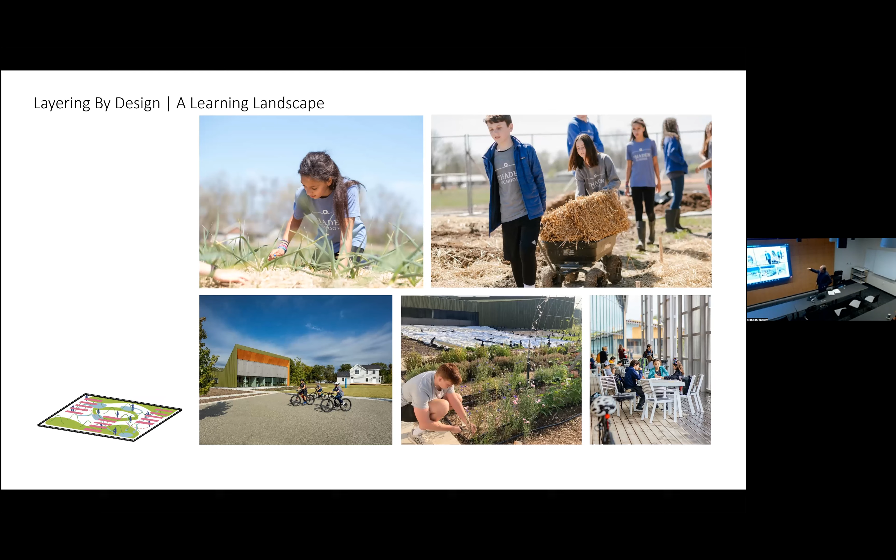So again, hands-on projects and activities, and these wonderful porches and breezeways that are interfaces all along the landscape as well. And so this is a rendering of the master plan we came up with, a series of figures, buildings, classrooms, performing arts, the home building, a bike barn, and then this beautiful landscape.

Simple palette, box rib metal systems with various profiles. We use plywood for ceilings. One of the buildings is all wood, the home building. Others are just simple steel and steel stud buildings, and then we use FRC panels. So very simple, simple palettes.

I'll start with just the first building, which is called the Reels building, and all the buildings too are 1 story tall as well. So it makes it universal design.

This is a building where we're using an operation called pitch and roll, which is the way in which you guide a plane, but it's also the way in which you can create dissimilarity, variety in the section of the classroom. So we're operating on this idea that this is a school that wasn't about the systemic sameness of most school classrooms, but every classroom, every space could be varied. This pitching and rolling also got us daylighting into the middle of the building, places you wouldn't often expect to find it. And then this sort of fold up here acts as these beautiful chapel-like spaces for the director's office and counseling rooms, but it also serves the community.

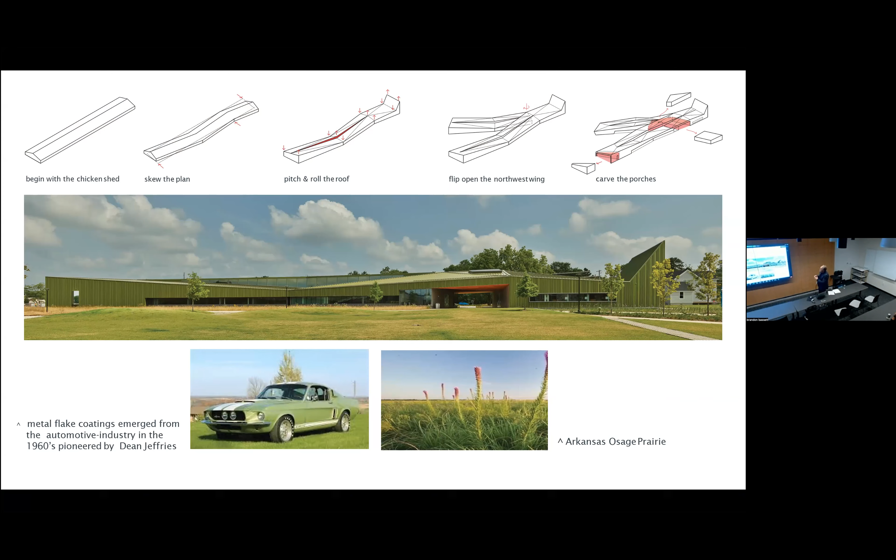And of course, I talked about PPG and Sherwin-Williams earlier. We got together with him again. We started with a 67 Shelby GT Cobra, green gold, lots of gold metal flake. Then we kind of calibrated that with Arkansas Osage prairie grasses to come up with this very distinct color that changes throughout the day. Really quite lovely when it begins to fuse with this beautiful wild landscape of the campus.

Carving through that, these linear buildings create a series of cross axes. These are really outdoor classrooms, but they also create breezeways and transition zones for students moving from class to class. All kind of clad in plywood. You don't see any real lighting cut out of it—everything, the lighting is disengaged or all up lighting. You can see that in the hallway, a vertical space with this incredible daylighting inside. You rarely have to turn on the lights in this space, except at night.

By pitching and rolling, you could scale the building where you need it to go. So here we're rolling up next to the boulevard, scaling towards the cars. We have the brise soleil for the western sun, as well as for acoustics into the student lounge.

What we like to call the double first cousin is the Wheels building to the Reels building. It has all the fabrication shops, robotics, wood shop, bike shop, all of that. And it makes an interface onto Main Street, which was required by the Design Excellence Program here. So we have this perforated porch that knocks down the western sun, but also gives some idea of space on the sidewalk. We also have along the south side, the productive landscapes. Students are actively involved in growing and producing the food here. It's a great place to go for lunch, by the way.

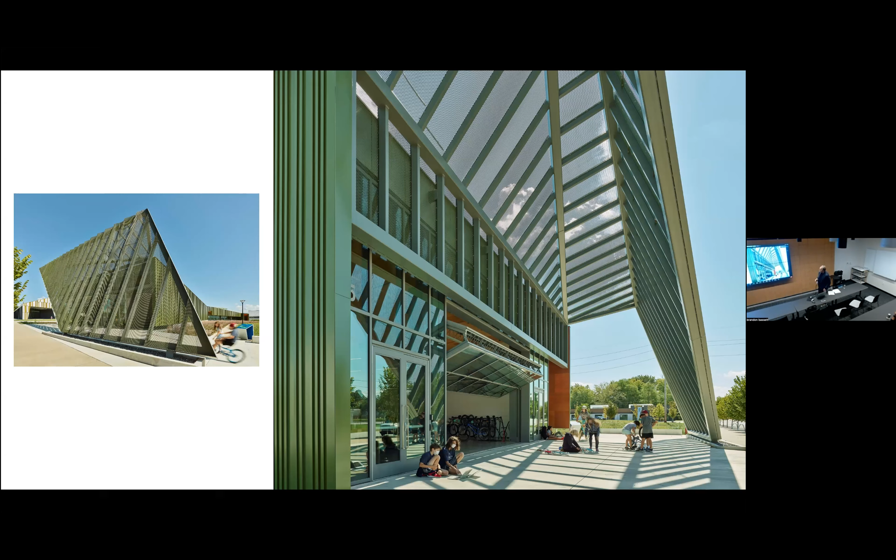And the bike shop, the door rises up. They work on bikes as a community service on the weekends for folks. The students learn how to service bikes, and then get to see. So this activity, this hands-on making, you're moving everywhere from physics to mathematics to a host of different collateral subjects.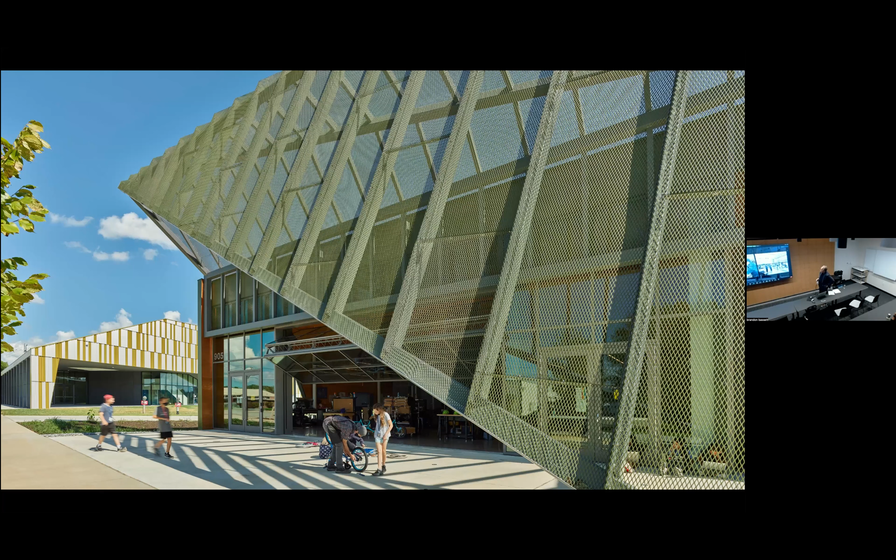And if you look beyond, you'll see what's called a performance building. This is where they teach acting, drama, they perform plays, they also have music, and choir, that sort of thing as well. It's a teaching facility.

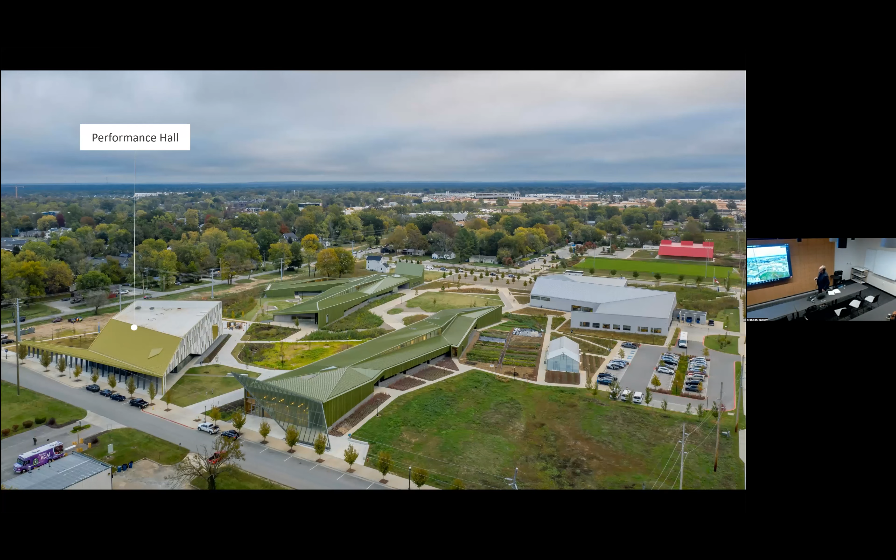It's got a 300-foot long loggia. This is something I designed while I was enrolled back at the academy in Rome. So a little bit of Rome got into this.

But rather than put the building on the corner, we thought of it more as urban pastoral. We're actually putting a public plaza on the corner, framed by this loggia, and then the building moves more towards the center to frame the central axis through the campus.

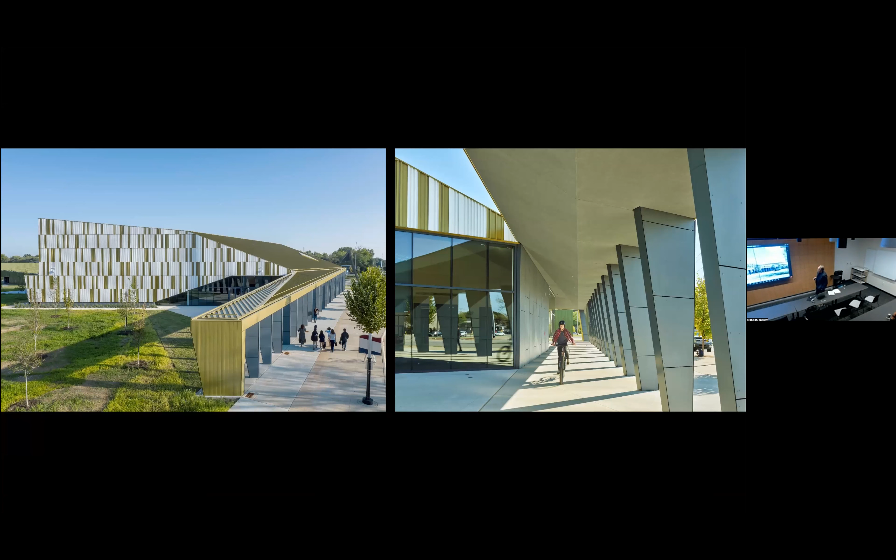Here you can see how it's used. Bicycles, skateboarders, pedestrians, whatever, all becomes the kind of urban edge along this part of Main Street, really to set up an idea of how other buildings might respond to Main Street as well. There's no lobby here. The porch is the lobby.

And then once you enter in, you can go off to the left to the rehearsal rooms or into the auditorium itself.

That auditorium actually models the facade, so the rake of the auditorium is the rake of the building. It begins to shape the building.

Here we're using a '71 Camaro. Instead of green gold, we're using gold green with gold metal flake dust in it as well. We're nothing but consistent. So you can begin to see how this works.

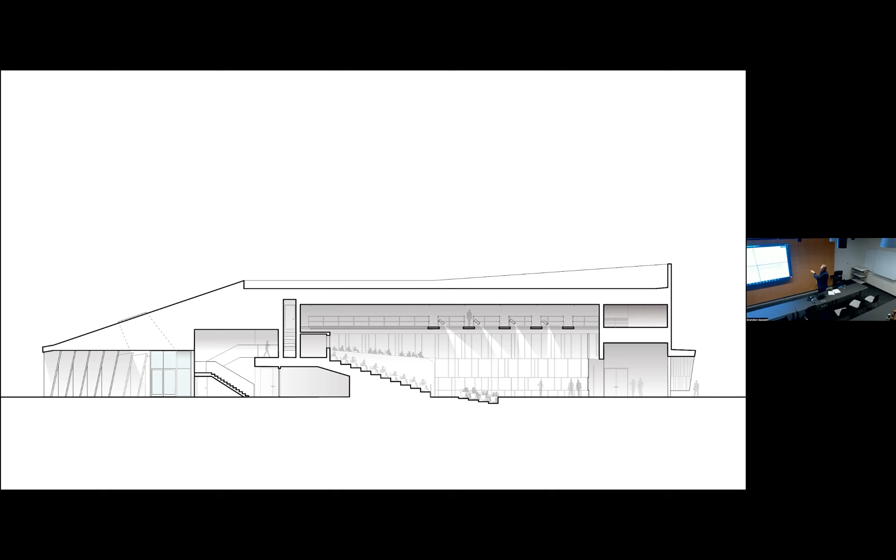The stage is actually on the ground level. So they actually make their stage sets in the wood shop over in the Wheels building, and then roll those across the campus and then take right through the back, right onto the stage. So there's, again, a kind of interconnectivity between the different buildings here.

Then we just use local red oak plywood to make up the articulation of the walls with one monumental window, something we thought of as education space. It would have a connection to nature that you obviously could control, but would be a kind of inversion of the planar and angle geometries of the inside.

In this case, it's all hand trowel plaster, kind of bend the light softly around into the space, provide again this connection with nature beyond. And you can kind of see that whole different geometry on the outside. So it's a kind of figure with the angles and then the softness on the inside.

It's a nice backdrop to the activities on the landscape.

So the last building I'll share with you, and again, I'm so sorry that I had this on fade. It's like I feel like I'm in a Sam Peckinpah movie. But the bike barn, so these are the Barnstormers. That's their mascot, is an owl.

And the headmaster, Clayton Marsh, said, we have to have a barn. We have to have a gym. We don't have a gym. We don't have the money for that just yet. What could you build us, a barn? And I said, sure. And he said, yeah, it's a 10,000 square foot barn. And let's see if this will move.

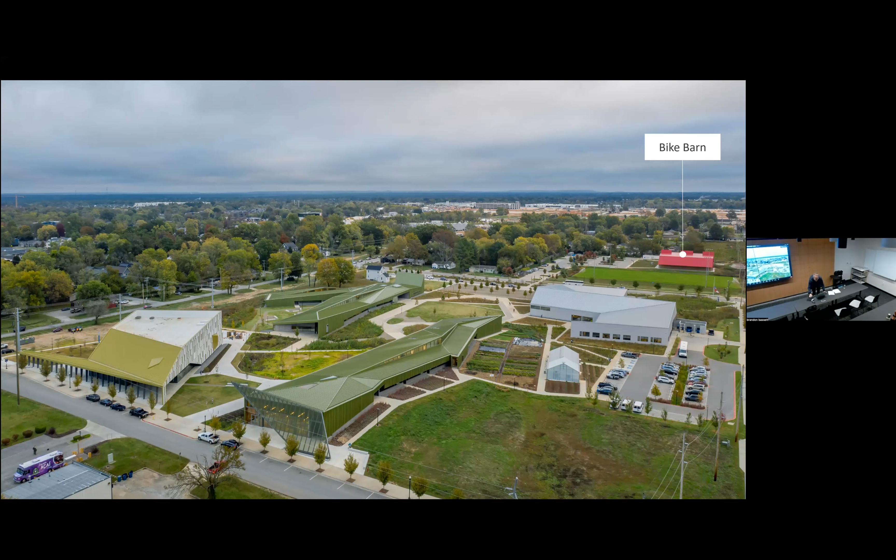So here's this barn, but it's off the grid. This is a barn that has to be naturally ventilated, like a real barn. So we built it like a farmer would build it.

I'd been working on a contemporary Ozark barn for about 30 years and finally got the commission to do it. We're using local cypress that we can get, which is what the painted boards are. They're spaced kind of wider apart than normal, and they have copper screen behind them to get the airflow we needed.

Then there's a series of dormers that operate and create a chimney effect. All of these doors that you see here open up, so the barn turns into almost like a pavilion, but can again ventilate itself naturally.

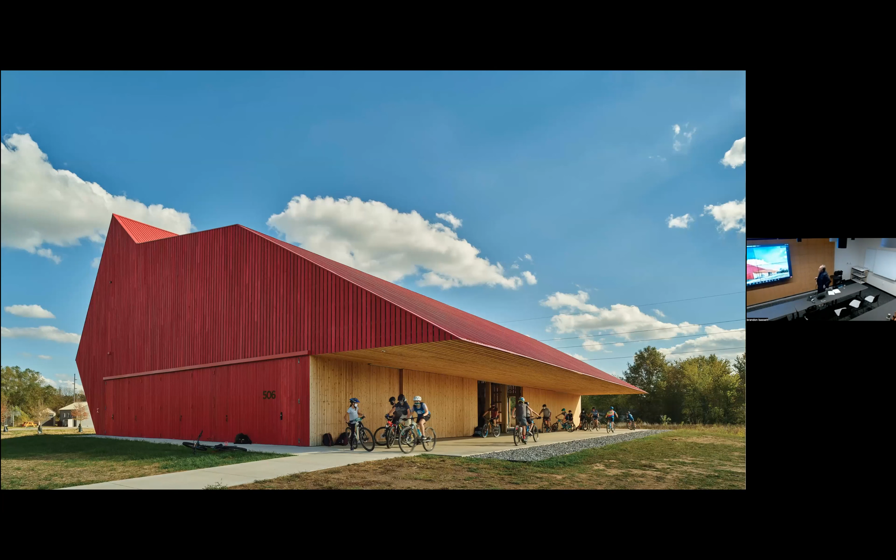Then the soccer field, the pump track, so bikes can roll through the barn and onto the track system. You can see the dormers, every other glass pops open, and the heat rises in and out of that. The porch provides a really nice shade where the parents hang out when they're watching soccer, and the bikers hang out too.

So how did we do this? Well, we didn't have the money for mass timber, sorry. So what we decided to do was a mass of timber. We went to a local truss manufacturer that makes residential trusses, and showed them this diagram of our truss and said, can you do this? And they said yeah, we can do this. And they all made it in one piece.

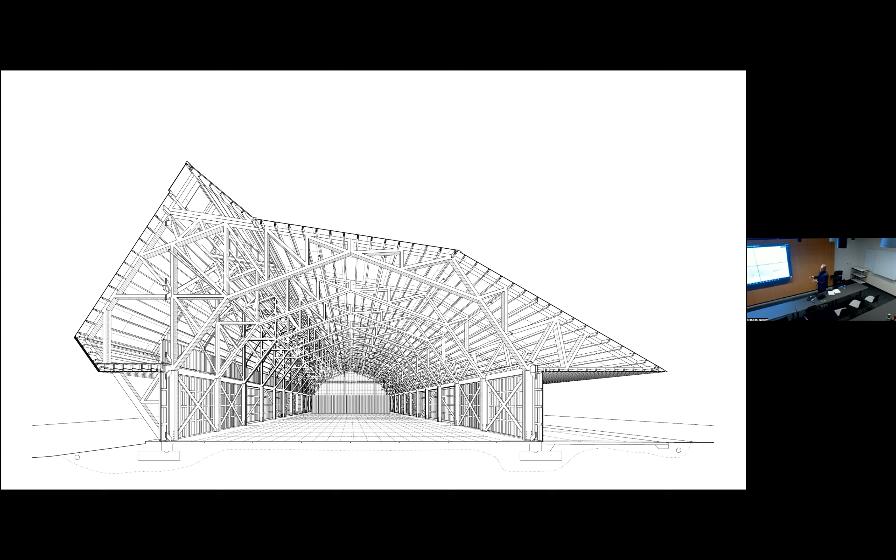It was pretty amazing. You can see the trace of the traditional gambrel Ozark barn underneath, and then how it expands to capture the porch, the mezzanine, the dormers, and create this new figure through the trusses itself. We're using flitch plates and other things too with the wood.

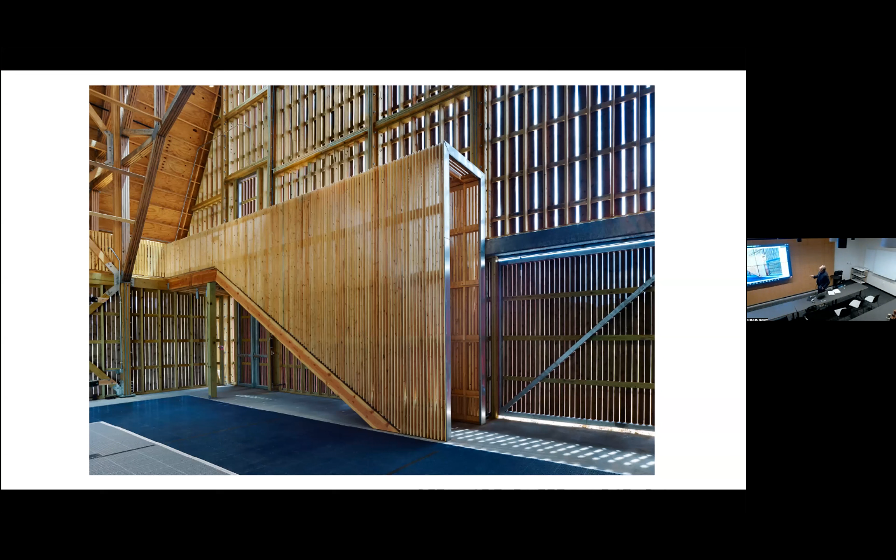And this is the interior. It has a very kind of transparency to it on the inside, a screen-like effect, all for the air to come through. And you see all the doors open up. Then simple things like this stair element - how do we begin to clad that and make it consistent with the articulation system we had?

So continue to think like farmers. We just took 2x4s and cut them in half diagonally, then rotated them and back-screwed them to make the whole cladding system for the rails as well as for the stair itself.

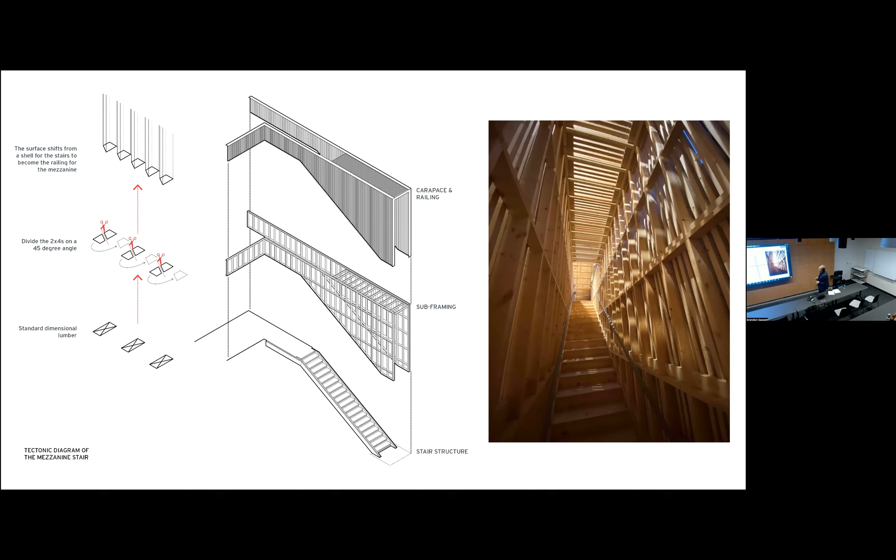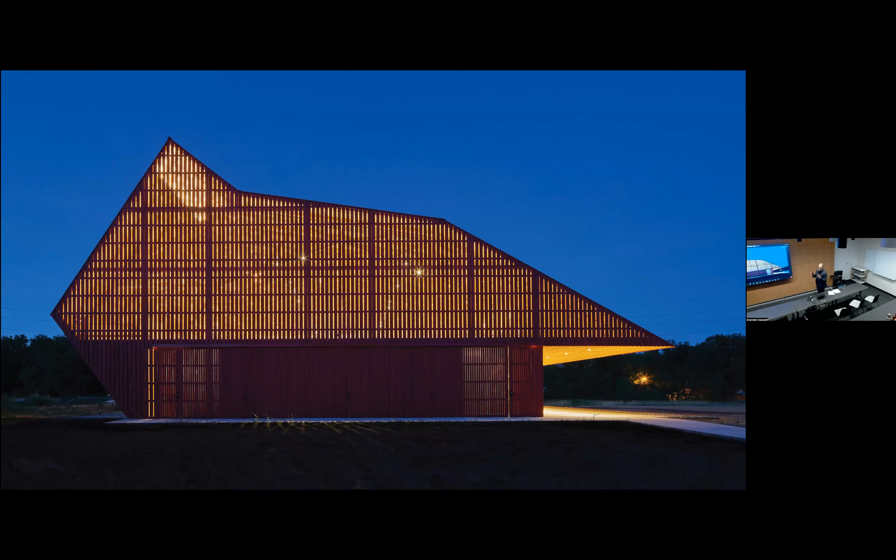You can see this as the sun begins to set. Throughout the day it's pretty much opaque - it's this beautiful red form or silhouette. But as the sun sets, our lighting designer designed it in such a way that the lights slowly turn on, so at dusk it becomes somewhat translucent. And then as the sun really drops over the horizon, it becomes totally transparent, this beacon for the school, as well as an icon in the community.

So with that, I'm done. Thank you.